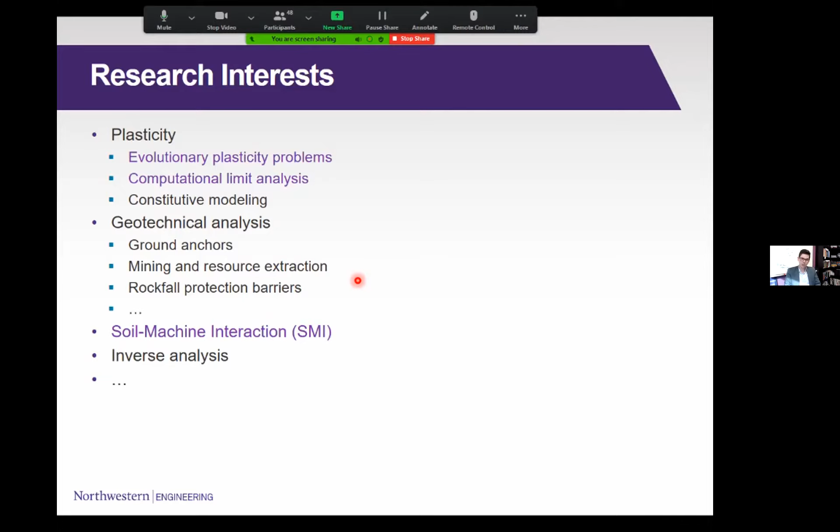I want to just touch on all of the things that I'm not going to get to talk about. I have varied interests, some in more fundamental plasticity and constitutive modeling. This is some work done in Australia with Andrew Abbo, Andrei Lyamin, and the late Professor Scott Sloan, who tragically died a couple of years ago, suddenly, too young. We've done work on yield surfaces and constitutive modeling, and more recently some interest in constitutive modeling.

My first PhD student—there's always a story to all of these—his work was actually on ground anchors and screw anchors, which are intellectually interesting because there isn't much known about the anchor installation process. We managed to build some models and do some centrifuge testing with the folks at University of Western Australia. My colleague Sam Stanier, whose name you're going to see, he's now at Cambridge, Christophe Gaudin, and Cyrus Todeshkejoei is the student who did this.

I'd love to talk about this work, because it's an ongoing interest. One of my students, Anna Stajanali, and I went to a field site, or a home actually, where helical anchors are being installed, and there's a lot of interesting things you can do there, both intellectually and practically.

Another one I just wanted to mention here is sort of a tangent. You feel like there's so many interesting problems in the world to solve, and at some stage you realize you have to focus on something. But we did some work on rockfall protection barriers, which involves plasticity, and again is amenable to simplified analysis and more complex numerical simulation. That's one of the themes I'm going to go with today.

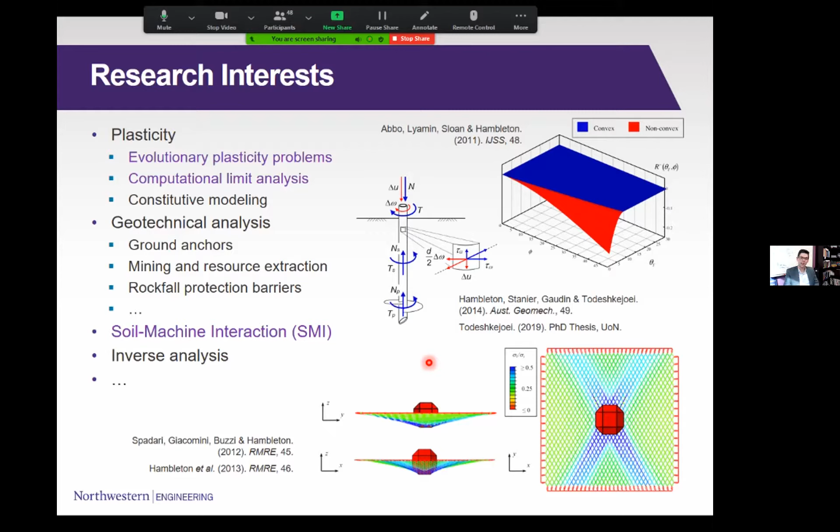What I'm going to go with is soil-machine interaction as the theme of the day. This is going to be an autobiographical and chronological presentation explaining the full story of how I got into these problems, how we started to build models, and how it continues to be an area of interest.

At Minnesota with Andrew Drescher, we started looking at the problem in the lower right. This was a Minnesota Department of Transportation project where it's a very practical test that they do. They proof roll, and measure the penetration depth of wheels to see how well they've compacted soils. Andrew and I embraced this as a pretty interesting plasticity problem, and actually a very elegant one, where the inverse analysis problem relates the penetration depth to the strength of the material.

We envisioned at that time—this might look familiar to some, I borrowed this from slides I had put together even when I was a PhD student at Minnesota—problems in mobility, problems in off-road vehicles and land damage.

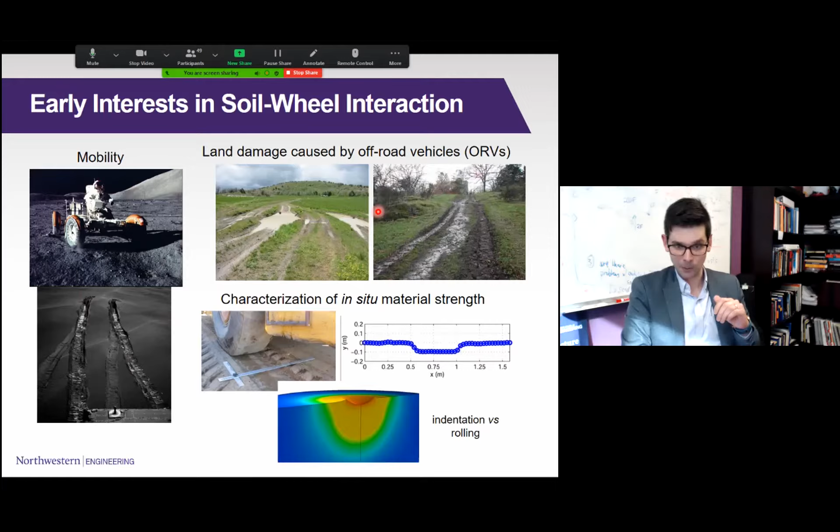We envisioned lots of ways that this could be interesting. The theme of the day that I want to go with, this is part one. I'm going to stick with wheels for the time being, but the theme of my presentation is going to be: which of these is the high fidelity model?

We do work on numerical simulation, the underpinnings to make those simulations work, running the simulations themselves. This, in fact, is work from University of Minnesota, a three-dimensional finite element simulation of a wheel rolling across a bed of soil.

And the question here is, you can do that. It's feasible to do that. You can also build these simplified approximate models and build analytical solutions for these. And one of my frustrations, as I've gotten into this, is that people perceive the left picture to be the high fidelity model.

I'm going to throw my colleagues at Caterpillar, the earth moving company, the heavy equipment manufacturer, under the bus here and say, they call these high fidelity models. And they use the term low fidelity, medium resolution, medium fidelity models for anything but this. If you're using equations, then it must be low fidelity. And I understand the drivers behind that. One is that you really generate beautiful pictures immediately when you do three-dimensional simulations of any kind.

I'm going to argue today, for the sake of being provocative, that actually that's the thing on the right that's the high fidelity model. And you'll hopefully be a little more convinced of that if you aren't already, in terms of what we can see when we start to build these models.

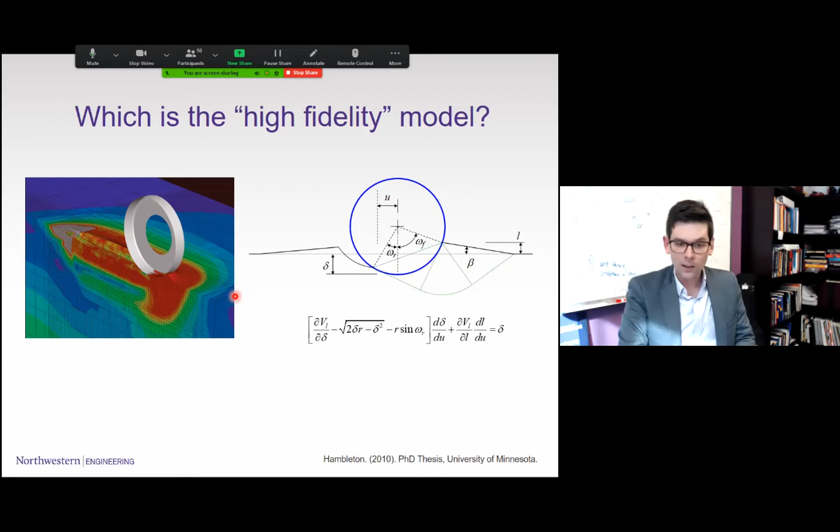I'm going to stick with the wheel for now, this rolling wheel problem, and show some work that we did after I left Minnesota, because it was just there for the picking. And I have to say, what drives these models is the fact that I'm an engineer at heart, and engineers contribute this to society, the fact that it just has to get done.

Many of us are mathematicians and scientists to various degrees, but what makes an engineer is that at the end of the day, I've just got to get a solution. I've just got to get the job done. So this chap, who shall remain nameless, is just getting the job done.

It's hard to get down to, you can't investigate the bottom of a shaft if the shaft is too small to crouch down into. So this chap here went in head first, thinking of safety, of course. There's a strap around his waist so that he can get pulled out of this at short notice. But this is an engineer at heart. And this is not, of course, me.

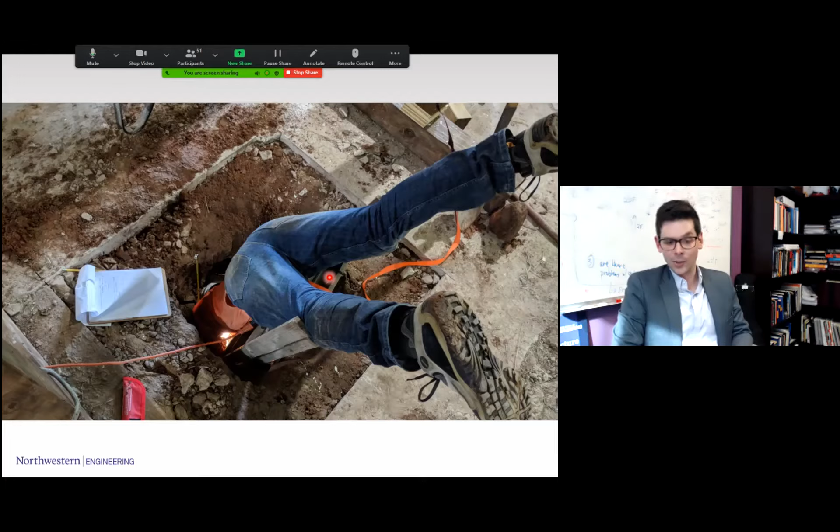But if it were me, this would be in the proud tradition of some of the things we do at Northwestern. Jorj Osterberg apparently had a reputation for going down into the bottom of caisson shafts, drilled shafts, in his suit and tie. And so that would be, of course, a proud tradition of Northwestern if it were me.

So here's the brutal engineering approach to solving this problem, which now I won't make so brutal. I think it's elegant, but we're going to make some very strong assumptions here. If I have a wheel that's rolling across a surface, I'm going to assume steady state conditions. You don't really need to assume steady state at this stage, but it helps to think about this problem this way.

There's a wheel rolling across the surface, and I'm interested in predicting, for example, the horizontal force F, depending on how much weight W is on the wheel and how much torque Q I apply to this wheel. And with total generality, I can write here that the wheel is in contact with the soil. The contact length here is H, and the contact angle is xi.

Now, what drives this assumption here is that somehow these forces that you're interested in that are acting at the axle have to correspond to the forces that are acting over the contact length here. And these I'll denote as V, H, and M, in keeping with what we do for combined loading problems in geomechanics. And actually, the moment that I've written this picture, an approach sort of springs to mind, or should, if you're familiar with VHM envelopes and bearing capacity problems under combined loadings.

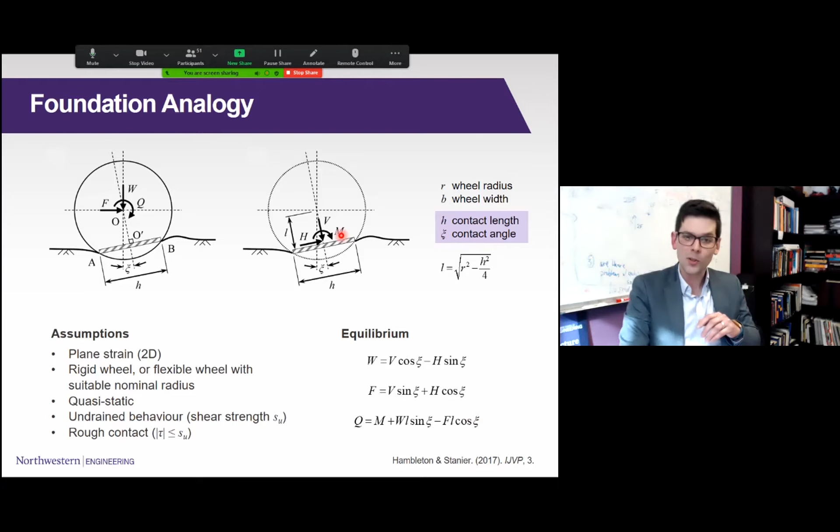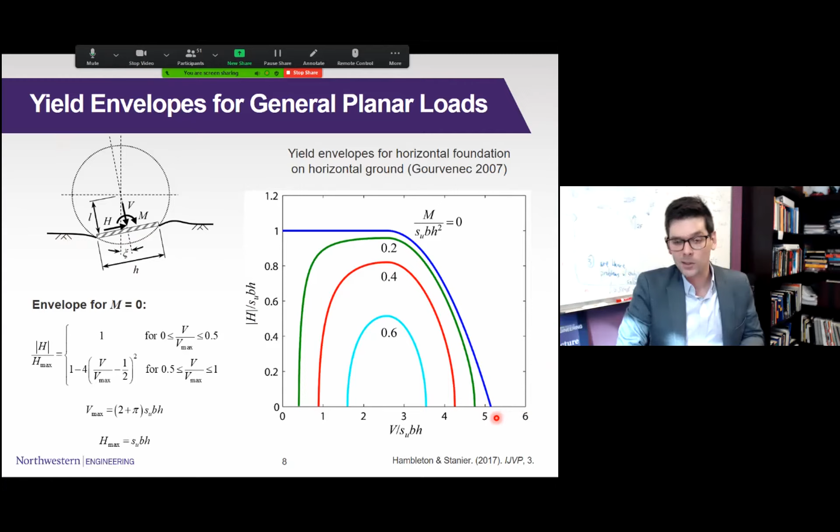Then as soon as I get enough normal force, I see a sharp decline in how much H I can apply, how much shearing resistance I can mobilize. It drops off and eventually reaches a point corresponding to the bearing capacity when there's no H at all—just pure V, pure vertical or normal loading. This is recognizable to some as 5.14, Prandtl's number, derived a long time ago.

At this stage, if you're willing to assume that on this interface you must obey the yield condition, life gets really easy. I'm going to do a couple of things that make it even easier. My colleague Sam Stanier and I thought about this for a while, and we can reasonably assume that the overturning moment at the interface is zero. That could be a subject of deeper discussion, but it's a reasonable assumption. So in comes assumption number one.

A very modest assumption is just a geometric approximation: the length L is approximately equal to R—it doesn't really matter. Here's a key assumption: we've said the contact length and contact angle are related to the penetration depth of the wheel. Explaining where this comes from would take more time, and frankly it's not of great interest—you can just take it as reasonable. As the penetration depth of the wheel increases, the contact length and contact angle increase, and I can parameterize all these curves in terms of penetration depth.

That was a mouthful—a very quick description of everything that goes into this model—and here is the final outcome, which I'd argue was very simply obtained. What's being plotted is the horizontal force: this is the resistance on the wheel, the lateral resistance. This would be drawbar pull in some of the mobility literature, or braking force—how much your axle is getting pushed backwards or forwards as a function of the weight sitting on the wheel, for different values of torque.

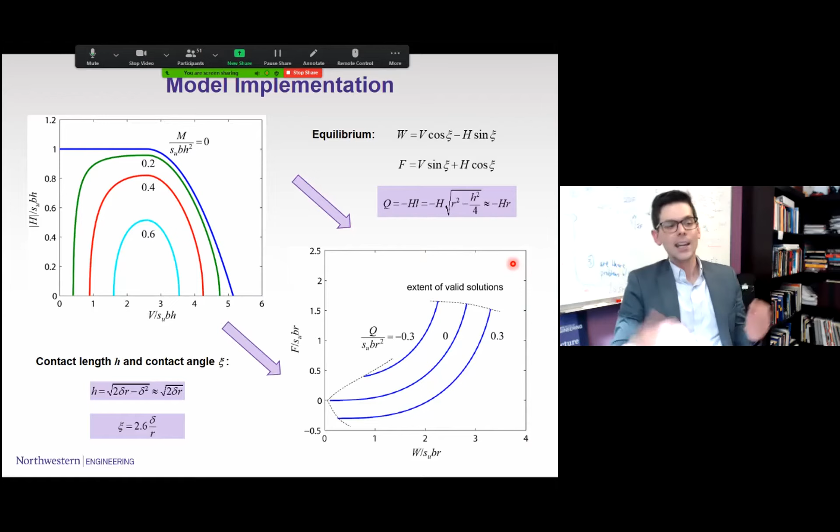Is it right? To answer that question, Sam Stanier and I went first and foremost to a solution that I was aware of that is really underappreciated, and a commentary on how science proceeds. Ian Collins in 1972 did a really careful, thorough, rigorous analysis of this problem, where he constructed slip line solutions, used method of characteristics in plasticity, carefully building these slip line solutions for different combinations of wheel loading.

Everything here is very similar to what I showed, parameterized by alpha, this internal angle defining the contact length. One of the lessons I've learned as an academic, for the younger folks out there, is that I think one of the reasons this paper didn't get much traction is because it's so dense, wonderfully dense in my opinion, but very unassuming. It's dense, it's rigorous, and it takes a little bit of time to unfold these solutions that are proposed. So this is what is actually reproduced from the paper.

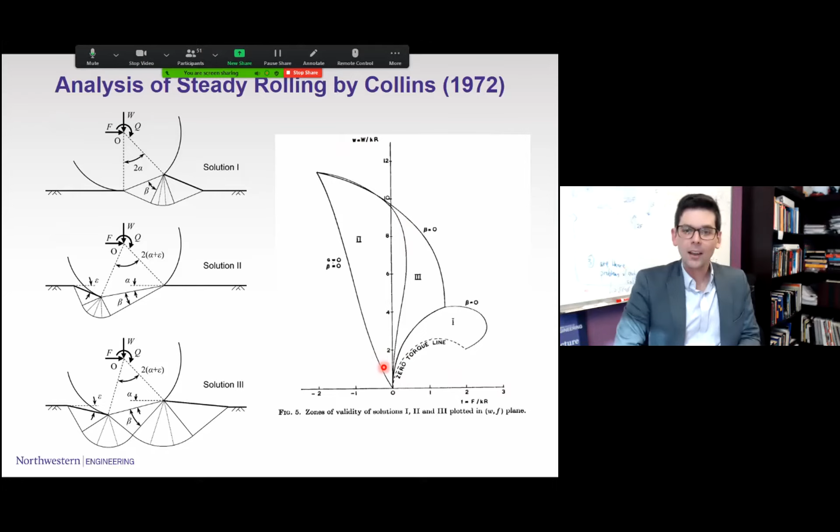Step number one is really just to take these strange looking curves and plot them in a way that's more compatible with what I showed before. On the left is what you've already seen, the one you get from the model I showed. On the right are these curves obtained through the slip line solutions of Collins.

Notice, first and foremost, how strange they are. It's rigorous, as I said, unassuming, dense, and there's a lot that goes into this. It's really quite beautiful, but the solutions are very strange.

Again, if you look at the towed case, a wheel that's getting just pulled across the surface with no torque, you can see already I have a multiplicity of solutions here. At a certain weight, I can actually construct two different solutions.

If I have the driven wheel, it gets even worse. If I pick a certain value of weight here, right on this line, I can have up to 3 different solutions for a particular value of applied weight to the wheel. So one of the reasons this maybe didn't get more traction is because it was so strange.

Now I'll draw your attention to the fact that these two plots are very similar. Look at the axes here, 2.5, 2.5, 4, 4. Quantitatively, it's a really good match between this very approximate simplified model and this more rigorous analysis completed by Collins, which strictly speaking is the more thorough, detailed version of what I've shown here today. That was a very satisfying result.

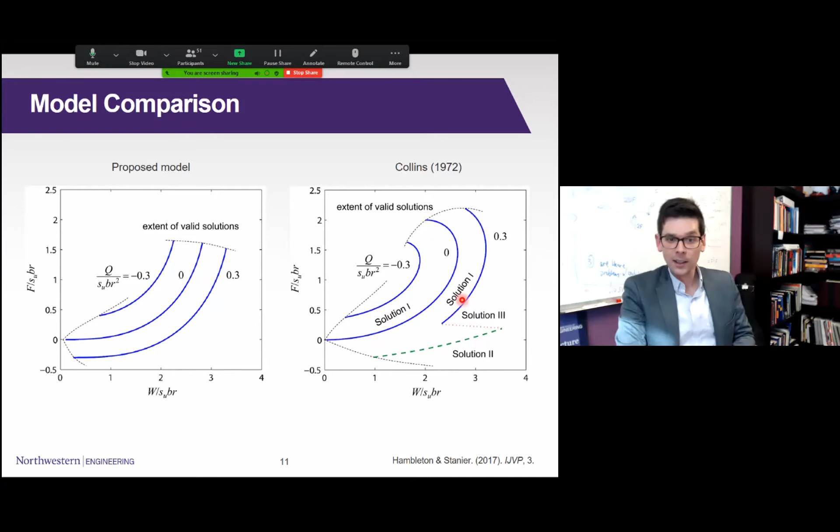I've already made this point that I'm an engineer. I will always be an engineer, and I'm not really happy until I actually have some data to compare this against. One of the interesting situations here is that there really isn't that great a dataset. You'd think it's clay, saturated clay—haven't we run tests on this before? The best that I could find, and I have yet to encounter somebody who has told me there's a database of results that I'm missing here.

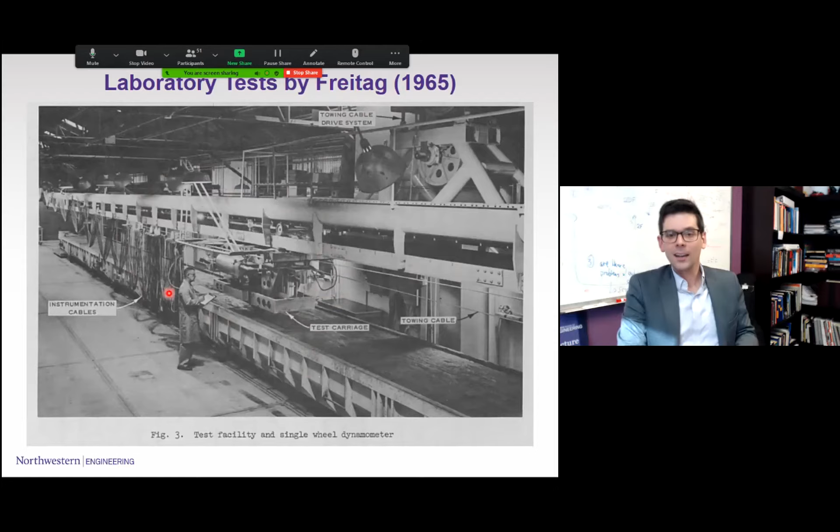The best I can find is this thesis by Freitag at the US Waterways Experiment Station at Vicksburg. They built this big test rig, and in this case, what they did—which was a mistake in my opinion, though I understand what was driving this—is they considered flexible wheels, tires like the ones you'd actually have on vehicles. This introduces a confounding factor: these are really three-dimensional wheels, flexible, with a strange geometry. So the data is valuable, but unfortunately it's not compatible with something we'd want to compare.

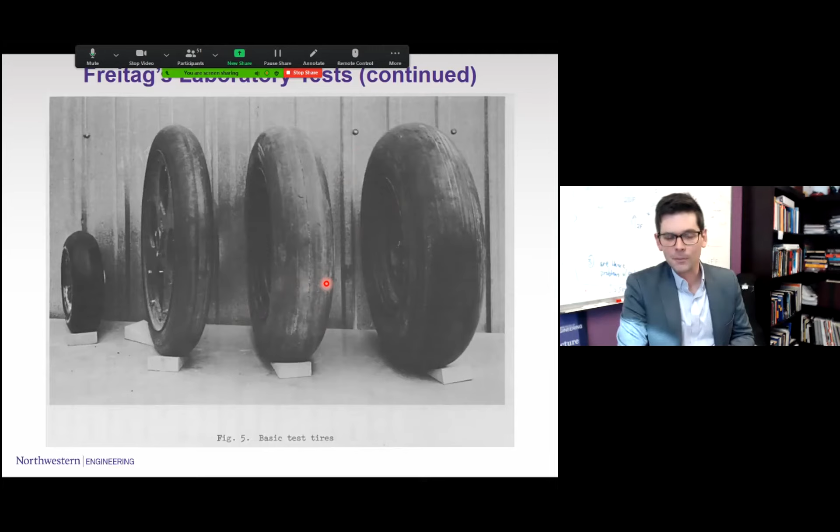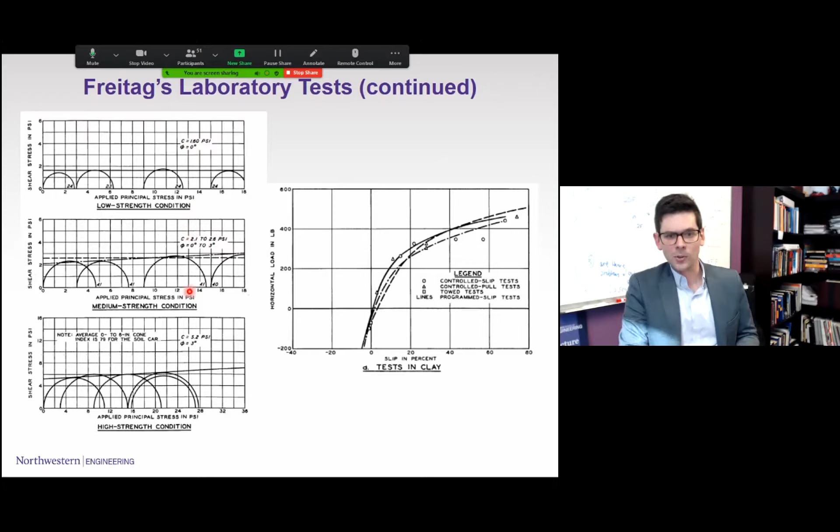What makes this data wonderful, and surprisingly it's not more broadly true, is that they actually did triaxial compression tests on the soil and characterized it very thoroughly. You can see values reported as cohesion, in keeping with how we still educate civil engineering students in the US. It should really be called undrained shear strength, if you believe the British school of thought, which I think is more and more coming to the US. They report undrained shear strength values, unfortunately in units of PSI, but we can easily convert and get some data.

Without going into more detail, I want to jump to the end: they didn't do a braked wheel, but in this study Freitag did the driven wheel case. So here are two sets of curves: the zero torque wheel, the towed wheel, and the driven wheel.

We are unable to find data like that, and at the moment we're not able to generate data like that in our lab, but you'll see what kind of data we can generate in our lab.

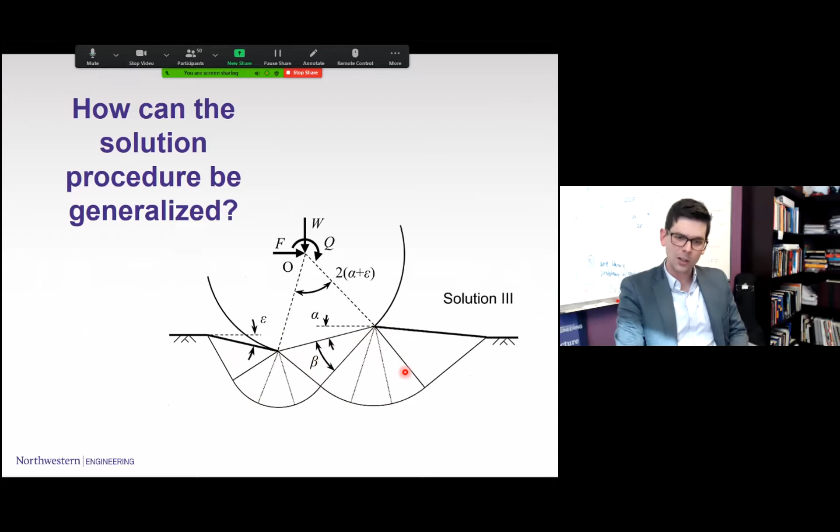So here I'm going to switch gears, part 2. The question I'm going to start to interrogate now is that this method of characteristics approach is very powerful but limited, in the sense that it's a limited subset of problems we can solve this way. So how can you do this more generally? Part 2 of my talk is going to go into how I can construct these solutions. I'm going to have to go to a numerical approach, but by the end you'll see I can use a pretty simple numerical approach.

Again, this is autobiographical—part of my training at the University of Minnesota, the way that Andrew Drescher and I were thinking about limit analysis. Kinematic methods are a way to get semi-analytical solutions. For a general problem where I'm interested in the limit load, I can break the collapse mechanism, considering the velocity field, the flow field corresponding to collapse, in a simplified way. Here we think of it as rigid triangular blocks that can slide relative to one another—a relatively easy way to construct these solutions.

The trick to constructing these solutions is you have to make sure for your material that you're obeying the plastic flow rule, you're obeying the jump condition on each of these discontinuities. And if you're doing this semi-analytically, what you do is construct a hodograph that relates all of the velocities V1, V2, V3 of these different blocks in such a way that you're ensured that the jump condition is satisfied.

And this lends itself to optimization. It's semi-analytical. I have to use a numerical scheme to find the angles. I can now optimize the angles here. And what you're essentially doing is finding the optimal locations of these velocity discontinuities, these jumps that can appear at different locations.

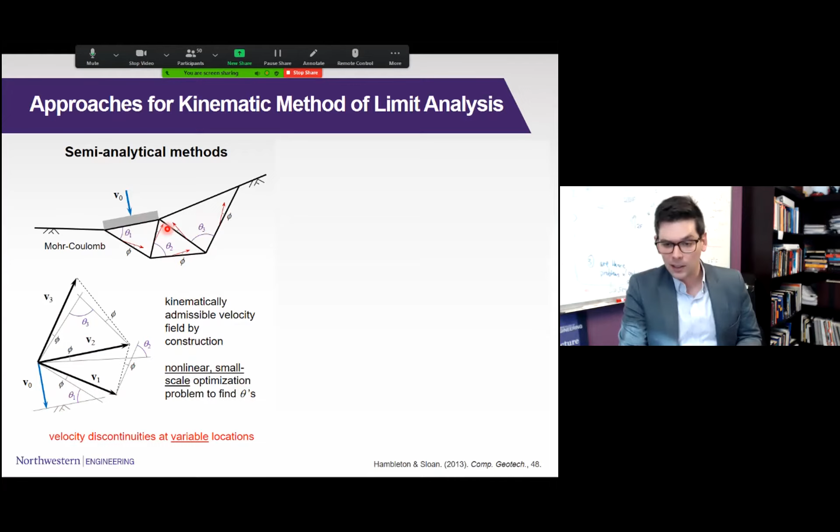Now, one of the things that I picked up while I was in Australia with the late Professor Scott Sloan is how you can do this in a very different way using finite element limit analysis, which Professor Drescher was never entirely sure about, and we've never resumed that conversation about. I'm now convinced that this is completely legitimate.

The way these methods work is that you now use a finite element interpolation to discretize a velocity field, and your objective then is to find the nodal values of velocity that somehow satisfy the constraints, these jump constraints, and other constraints arising from the flow rule.

And in this case, because you're dropping in a mesh, you can still think about these edges as jumps. It's right to do that, jumps between velocities and different elements. The thing is that these are now at fixed locations. The velocity discontinuities are fixed in space. They don't move. The question here is, how can we make these two things compatible?

There's a lot of power in this. These methods are okay. They're very quick, but sometimes they don't lead to very good solutions, and they're just not compatible. And you can't get the simple solution that you can get with these ones.

So what we did was we figured out how to make them compatible, and that is, I'm going to show you a numerical scheme which essentially optimizes the location of these velocity discontinuities when you use a finite element interpolation. And this will make a lot more sense when I show the examples.

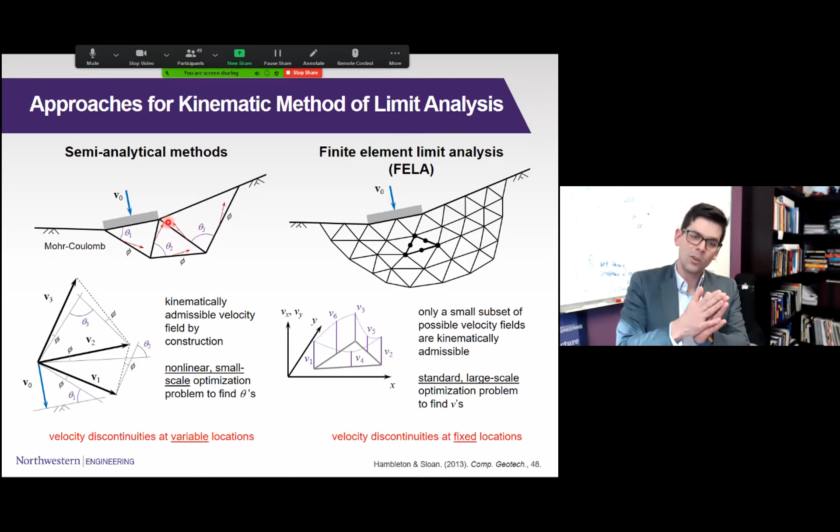My condition, or probably better still to say, pick this jump, which is between two adjacent regions. This block has a velocity, this block has a velocity. And along this jump, I have to have this condition, which says that the jump is compatible with the plastic flow rule.

Here's one way to write it that's going to be amenable to numerical analysis. What's in here are xk, the coordinates of the endpoints of the jump. These p matrices are just the matrices of zeros and ones. And as I say, this is just going to lend itself to easy mathematical manipulation in a minute.

And here is the jump in the normal expressed in terms of coordinates of the velocity jump and velocities between the two blocks. Here is the jump in the tangential component of velocity, and this is the jump condition.

The first thing that I'm going to do here right away is I'm going to say, I don't like this absolute value, so I'm going to replace this quantity here with a mu that I don't know yet. And here then pops out, for all of my k discontinuities, I have to satisfy these jump conditions, and I have k equations that, notice, are linear in the velocity and with respect to mu.

I can do the usual thing and derive an expression for the limit load in terms of mu and velocity, and I'm going to get a linear objective function, linear in the unknowns. And here comes the trick.

This unknown mu that is at the moment just replacing this jump in the shear component of velocity, all I'm going to do is insist that whatever that is, it's greater than or equal to the square root of lambda squared, where lambda now is the original quantity that appeared in the absolute value.

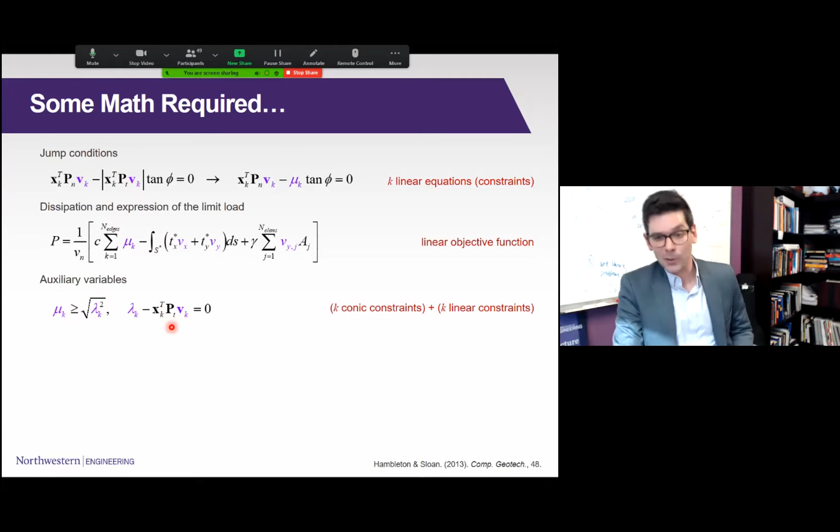And this is a trick which essentially enforces the absolute value and means that I can now use second order cone programming. This is in the canonical form of a second order cone programming problem. If it weren't for these so-called conic constraints here, this might be recognizable, and that's what I'm setting up here, as a linear programming problem.

And linear programming problems are, of course, very, very quick to solve, straightforward to solve using modern optimization techniques. That's sort of a standard formulation.

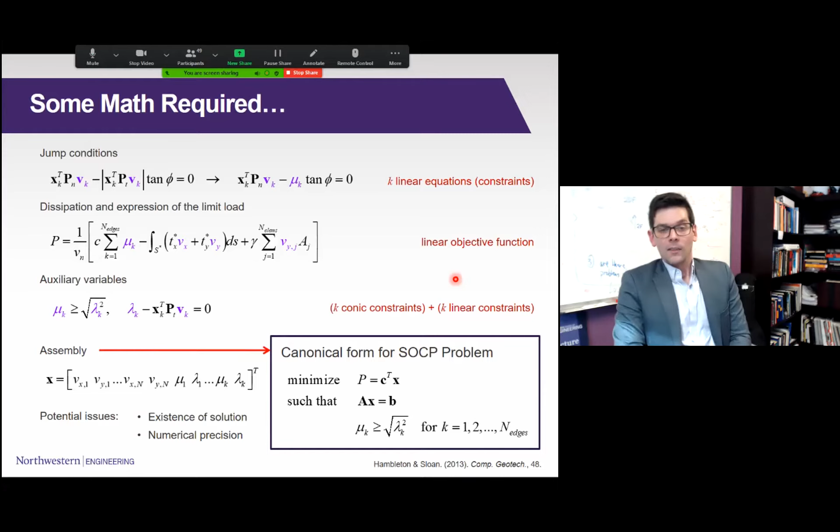Now, the big trick actually in this work, that was kind of known already with what I showed before, if you want to now optimize the locations of the velocity discontinuities, what happens is that the x's in these equations that I just shown become unknowns as well. What do you do about that?

Do I have to go to a general nonlinear optimization tool to get this to work? The answer is no. And the solution strategy that we proposed was just linearize about known points. So you have an existing solution that you trust.

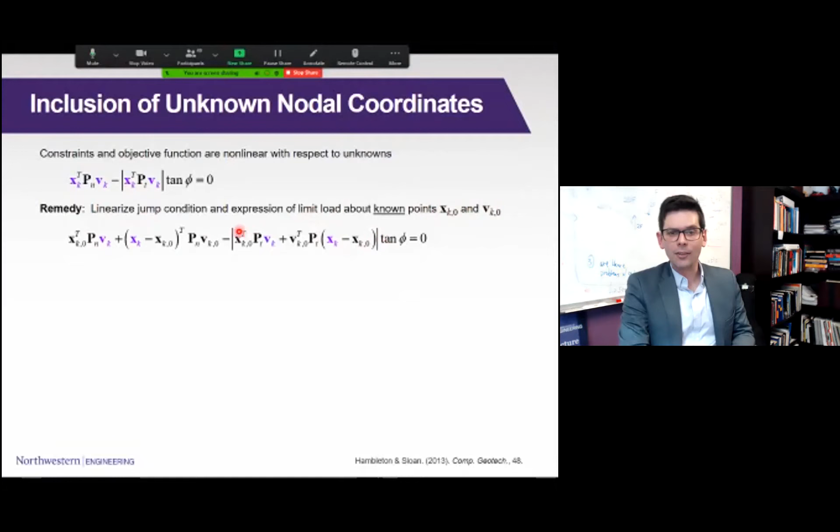Linearize the coordinates for the velocity discontinuities, the velocities themselves, linearize this expression, and then you return to having a linear or a second order cone programming problem. I can also linearize other things that are in here, the area that I need.

One thing to note in this linearization is that if I keep the coordinates fixed... what happens at the top here is that the x's are now unknown. That's what makes this nonlinear. But if you treat the x's as being known, you return to the original jump condition you were using, and you're solving exactly the same problem that I showed previously.

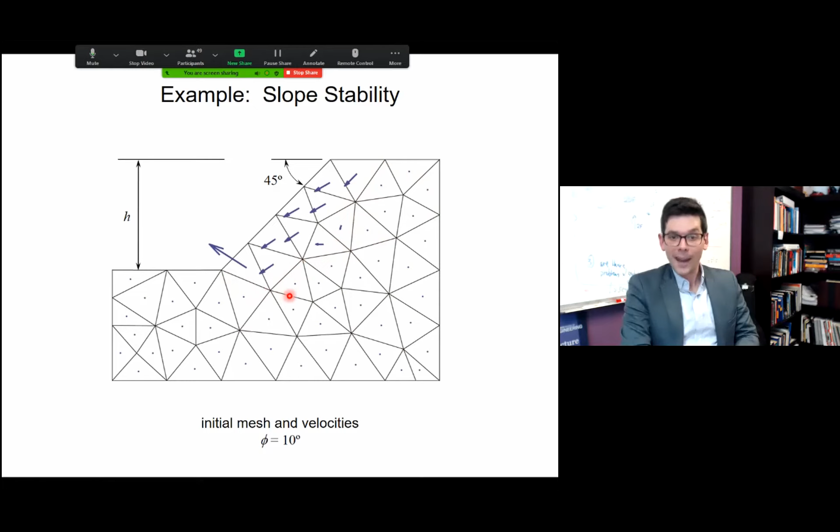But now what we can do is start to perturb the solution. That was the second slide I showed. Perturb and solve each time for the optimal locations of new nodal positions and new velocities. Keep perturbing the solution, and you wind up with this, which now looks lovely. This looks more like one of the solutions we would assume, and looks much more believable.

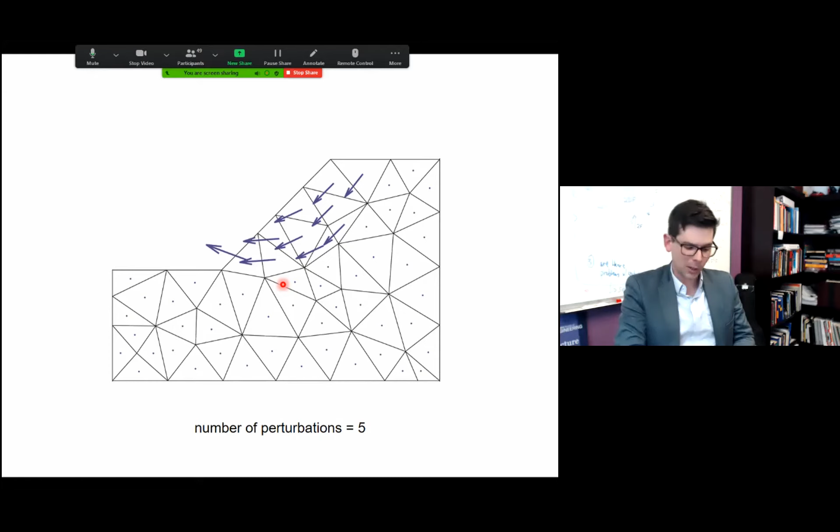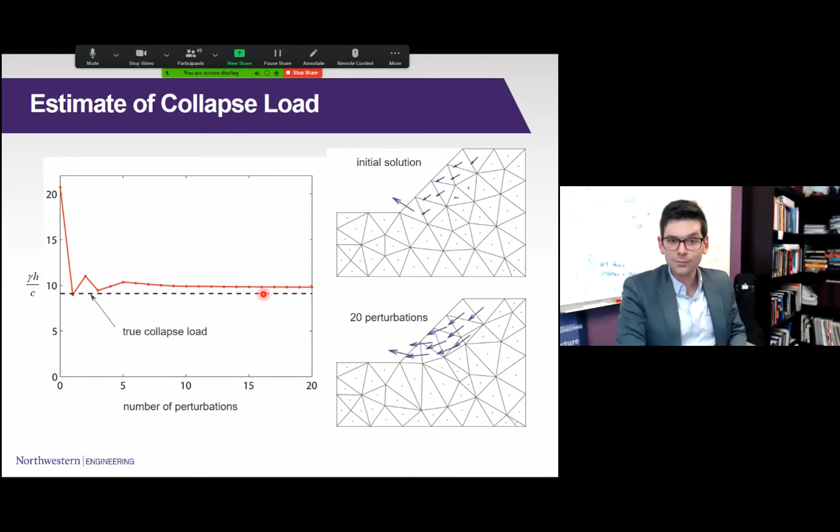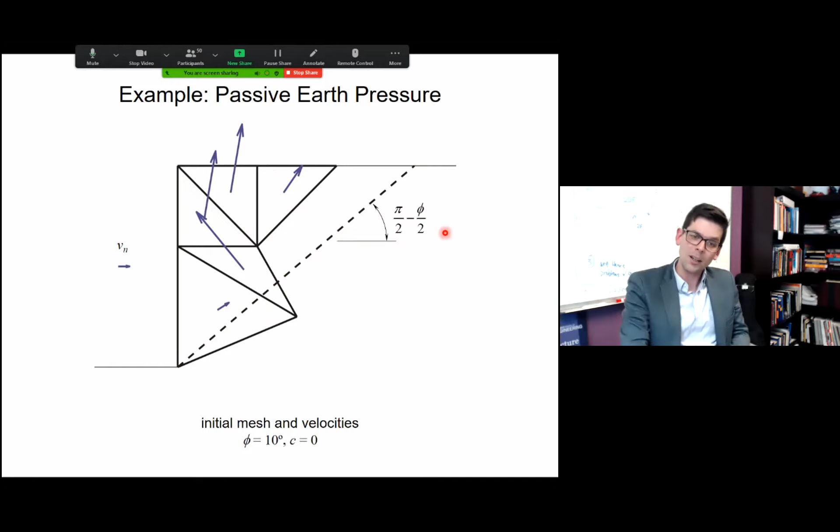I've run the first stage of this optimizer to compute element velocities, and I'm able miraculously to get a solution. The true solution is going to be the Coulomb slip surface, inclined at pi over 2 minus phi, the friction angle of the soil, over 2. If I perturb the solution, if I'm happy to wait and keep perturbing that very bad guess, you can see that I'm able to get closer and closer and eventually recover the exact solution, basically within 55 perturbation steps.

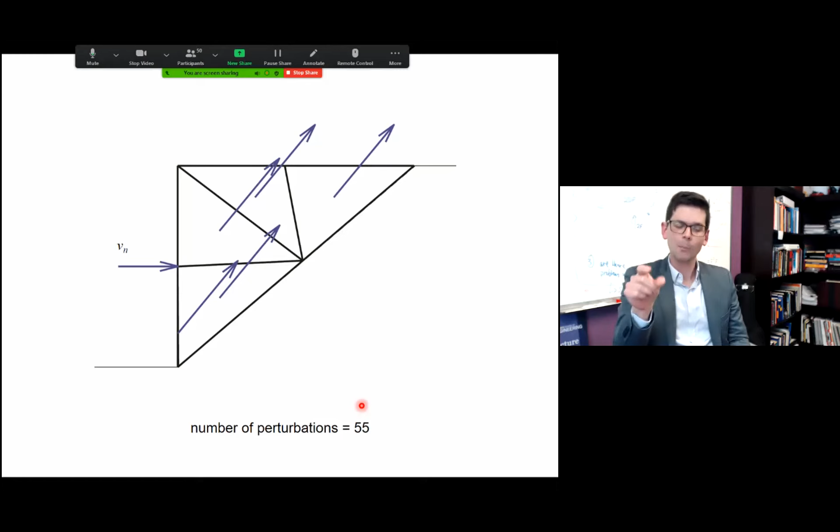So that's the end of part 2 of my talk, which is focused on these solutions that we need for these evolutionary plasticity problems that are somehow fundamental. I could, in principle, use that to go back to my wheel analysis and see what sorts of new and interesting things I can do there. But I'm going to move to part 3, and stick with this idea of passive earth pressure for a minute.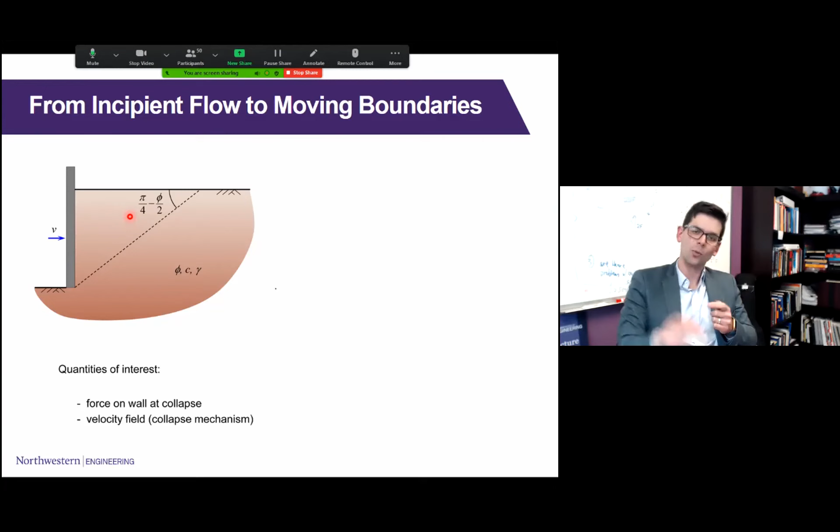So part 3 is now: what happens if I keep moving this wall? I'm interested in soil-machine interaction in a general way, and what I want to shift to is cutting problems, earth-moving problems. So I can stick with the example I just showed, but ask: what happens if I keep pushing that wall? What happens if I don't stop?

What's going to happen qualitatively is the geometry is changing. It's now a moving boundary value problem. I'm going to have a force displacement history, and things are going to depend on the displacement. I've got all kinds of questions I can start to ask: do I have a steady state eventually? Can I reach some sort of pseudo steady state?

The way I started to approach this problem, when I was thinking about it in Australia, was wondering if this cutting problem, this translating wall problem, is itself amenable to simplified analysis. And you do as one does when engaged with these things: you're sitting at home, you're in Australia, so Stockton beach sand is right there, just down the road.

You fill up a tub of sand and grab a copy of, in this case, the Intellectual Devotional given to me by my father, which turned out not only to be an interesting read but also an interesting research tool. I was sitting there with this tub of sand, pushing the book along the surface, just looking at what is happening in this region of soil as I'm pushing the book ahead. It turns out that was the genesis of a very simple solution, which I'll show in a minute.

But before showing the simplified solution, I want to motivate this problem a bit more. As I was thinking about this intellectually interesting moving boundary value problem, I was also thinking, this is everywhere, isn't it? Earth moving problems are like this, agricultural problems.

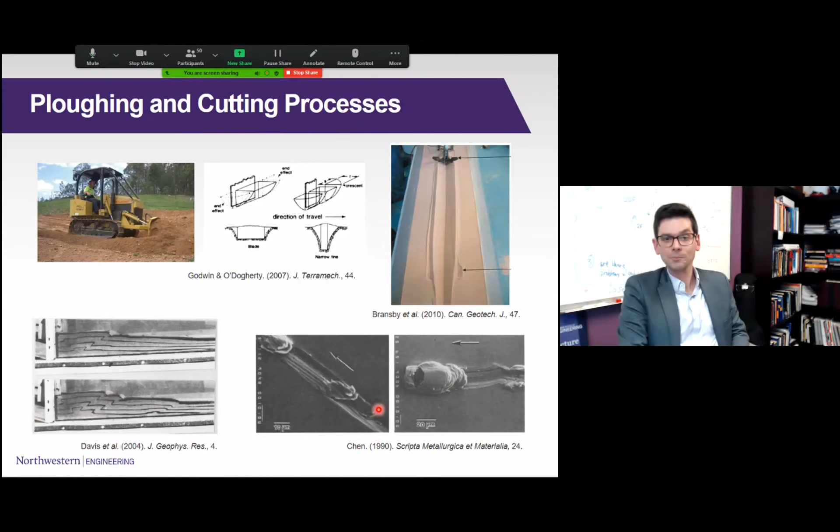And then at very small scales, you have plowing processes as well. Since then it's just gone from, oh yeah, truly this is everywhere. So I've lumped together thinking about Australia - this is in Western Australia, the gold mines. We do construction, we move earth on a massive scale, for construction and mining, for agriculture. Eventually we're going to be moving it elsewhere too - there's NASA challenges now about how we're going to build on the moon and on Mars. And creatures like ants, earthworms, rodents have been moving earth for a long, long time. So there's no limit to how you can think about these interesting earth moving problems.

I know I'm getting sort of short on time. I think I can present all of what's here. I want to return to this idea of fidelity.

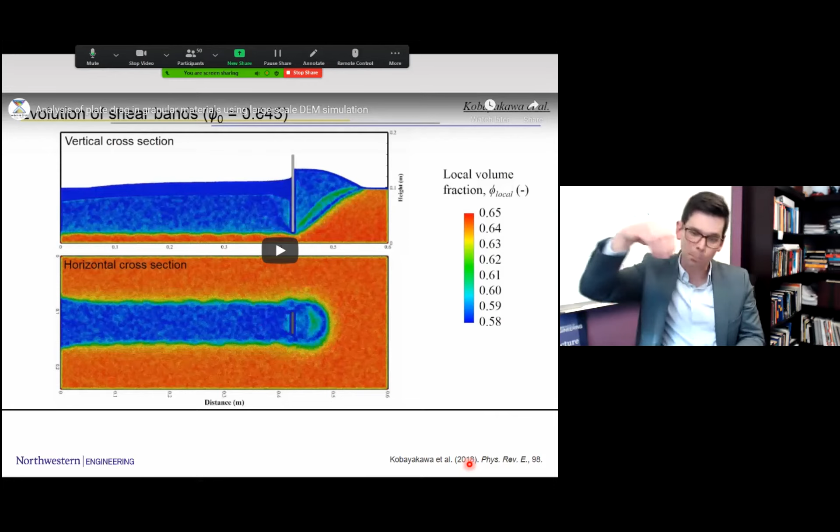This is work done in 2018. I was playing around with this book in my living room with my patient wife - the children hadn't yet arrived, so it was just Rachel being very patient with me as I played around with this.

Later, these chaps who I met at a workshop not that long ago showed a really beautiful analysis where they went to great lengths to do the numerical simulation of this cutting problem. There's a huge number of particles here - that's really one of the things that makes this study remarkable.

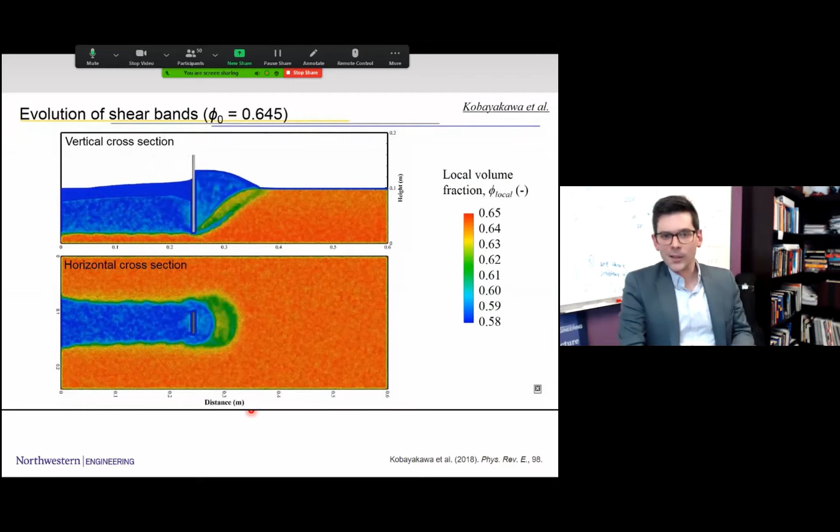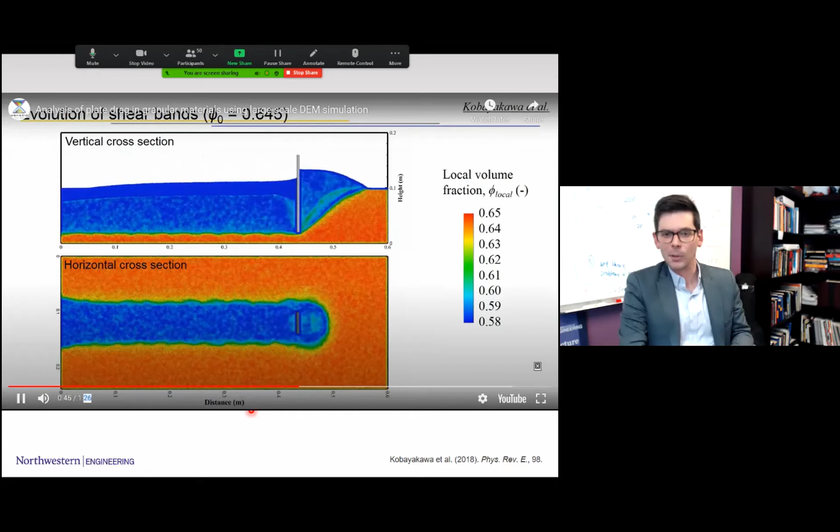I won't go into details, but notice that in this DEM, discrete element method simulation, they do this cutting problem, and you can see these bands forming and disappearing. You can see there are oscillations in the force displacement history as these shear bands form in the material and then are deactivated and disappear.

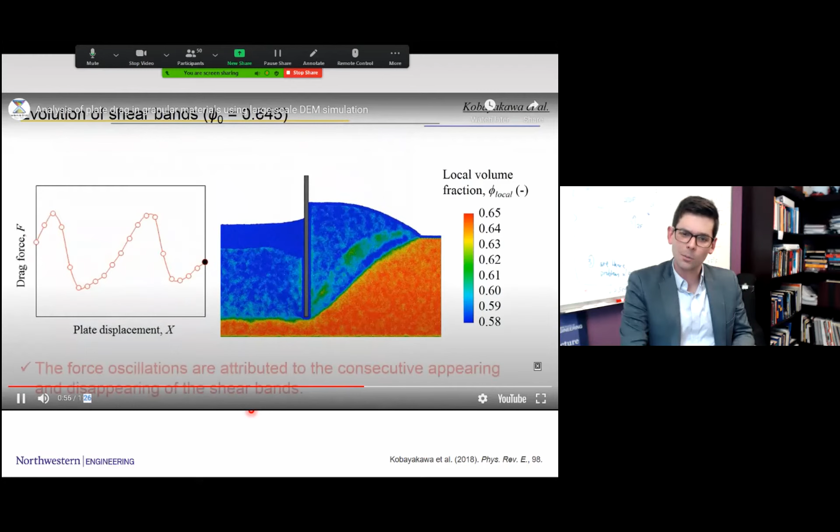Keep in mind, this is 2018. The work I'm going to show, we published in 2014. We looked at this problem and said, here is another problem amenable to simplified analysis. If I've got a wall moving in a different direction now, what I can do is postulate that I have a band, but a band at an unknown location.

Beta now is going to be the inclination of my shear band, and I'm interested in predicting the progression of the shear band, or more generally, predicting the progression of the force. How much does the force P increase as you displace the blade into the material?

You'll make the same assumptions, but now it's sand, not clay. It's plane strain, quasi-static, and here it's sand with just a friction angle, internal friction angle. I'm going to assume the wall is rough. The force on the wall is P. The height of this material that's being pushed around is H. The penetration depth is delta, like it was for the wheel.

Beta is the inclination of a single slip surface, an unknown inclination angle. From the yield condition and from equilibrium, you can immediately derive, without loss of generality — I'm also assuming this is a straight line. That isn't a strong assumption, it could be weakened.

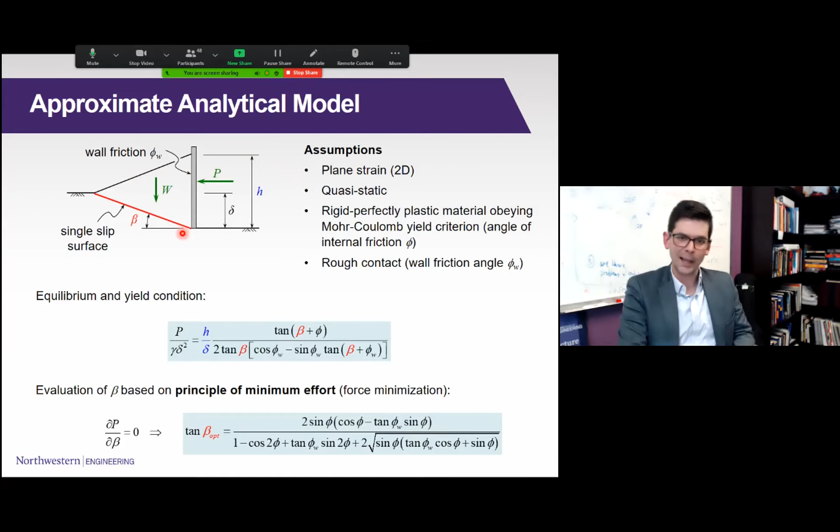We'll assume that everything I displace as I'm pushing through a displacement delta winds up in the accumulated material here, and I'll neglect the fact that there's contraction and dilatancy. I can then use simple volume balance to say that the height has to be equal to this expression.

I feel like I'm done until I actually plot the solution, which you'll see in a minute. And this solution is strange, because at some point the inclination of the material ahead of the blade is going to grow unlimitedly — and it's sand, so it's going to start collapsing. At some value of alpha, I'm going to have collapse occurring, and then my solution is just ridiculous. It doesn't make any physical sense.

So you could say, let's fix that problem. If I know that collapsing is going to happen — and there's actually an example of that done in the literature — why don't we just assume from the outset that this angle alpha, the inclination of the moving front of this accumulation of material, is equal to the friction angle. That's like it's continuously collapsing, just sitting at the angle of repose.

What that means is that I can derive a new beta in the context of this solution. So I've got two solutions now to this problem. Which one is right? It turns out neither of them.

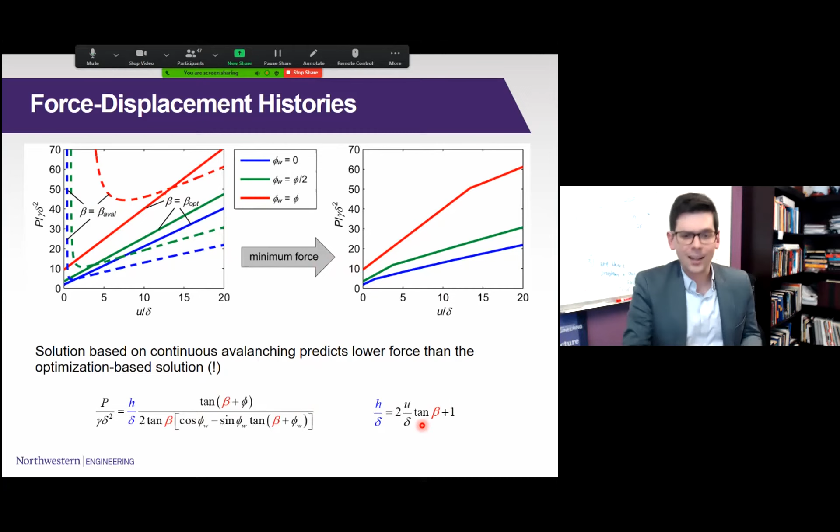It turns out that H depends on beta, and I need to plug in and optimize that whole expression together. This is a surprise - if you go into the existing literature on this, it's really overlooked. I don't have time to go into the full depths of why this is important, but you can at least appreciate there are two families of solutions and neither of them are right. In fact, the complete solution comes from putting it all together.

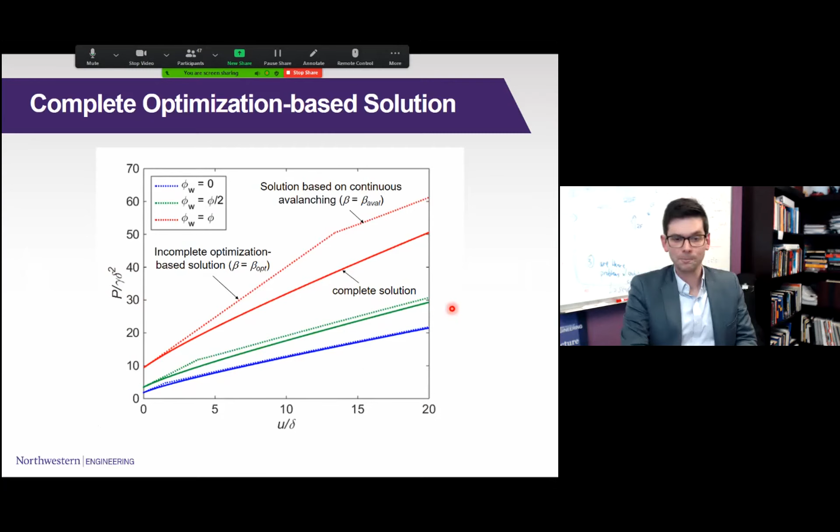You can do it, I'm not going to go into details on that. The complete solution generates a lateral force that's less than either of the other two solutions that I showed.

Now let's talk about how we can make this a little bit more general still. I know I'm running out of time, so this will have to be pretty quick. What about these jumping bands? We saw that the geometry of the surface was pretty irregular.

So one thing we're going to do right away is discretize the surface using nodes, constructing the surface as the line segments between these nodes.

Now the solution proceeds as follows: I can have any band at any location. Beta, the angle of the band, can be whatever it wants to be. I'm going to optimize this ultimately, and the bands are going to span from the toe of the blade to a node - that's the only thing I'm going to insist on, so that I can bookkeep things and construct this.

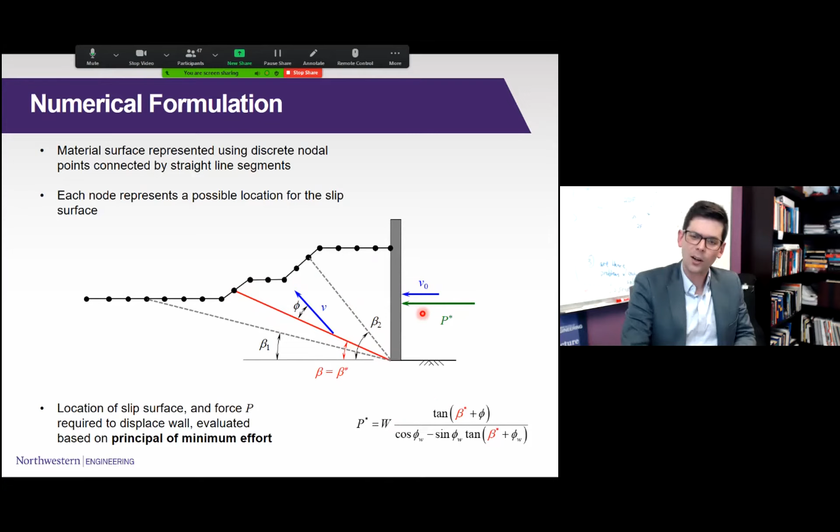I'm going to construct this solution by saying within every increment of deformation, I'll find the P star that's the least, using the principle of minimum effort again. Once I've found a solution within an increment of deformation, my kinematics are really simple.

All I've got to do is - I've got a rigid block of material here - shift the nodes that are moving by an amount that corresponds to my increment of deformation. I've plotted velocity here. I can see somebody's drawing on the screen, which I like.

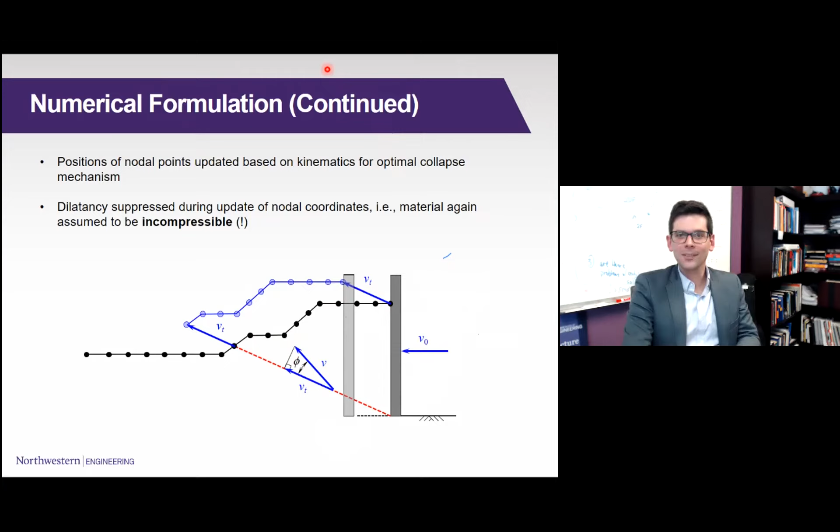I love interactive presentations. We should probably clear that. Oh yeah, and oops, resume share. Somebody who's in control of the presentation will have to clear annotations if you want.

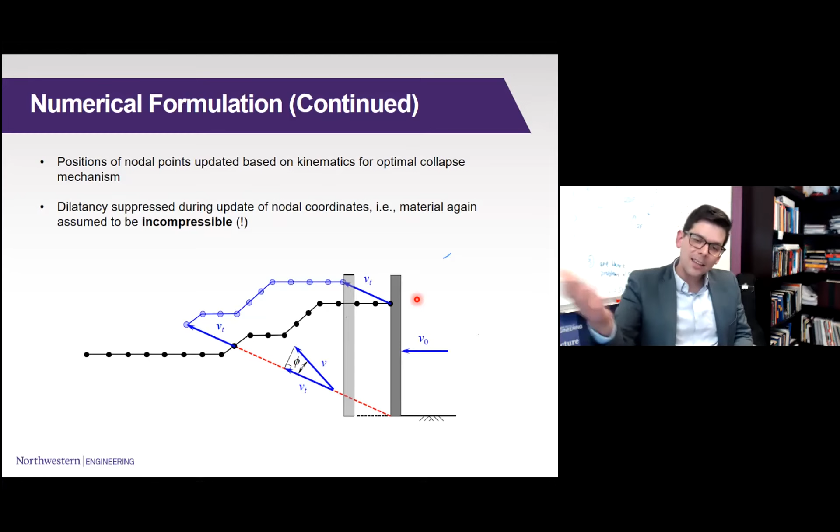So updating the kinematics within an increment of deformation is going to be pretty simple. The trick to getting these jumping shear bands, it turns out, is because I'm in dense sand, I have to somehow have softening.

The proposal here in this solution is to ascribe a state variable to each one of the nodes that's able to track how much softening occurs as the band is sitting on that particular node.

As the solution progresses, as the shear increases on that node, if the band is sitting on that node, we're going to decrease the friction angle. It's going to soften up to some mobilization length UR, and then it's going to hit the residual value corresponding to critical state for the sand.

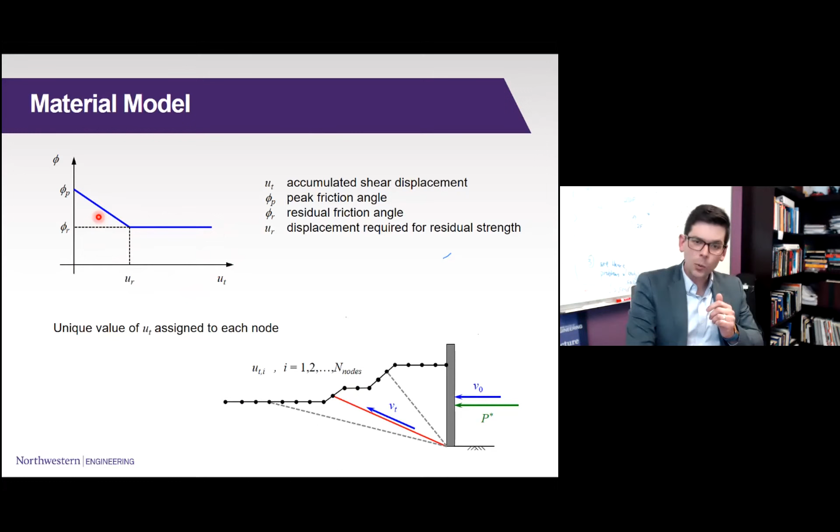That's all I need - I need to introduce softening in this way, and think about a few more algorithmic details. For example, this idea that the material is collapsing - you have to do something about that. Turns out that's fairly straightforward.

The overall algorithm, I'm not going to go into all the details, is just keep going, updating your displacement increment, marching forward while looping over. It's a very simple optimization procedure here.

You just look at all of the nodes, evaluate what the force should be if the slip surface is on that node, and there's a little bit of meshing - thinking about how nodes are colliding with each other that we have to do - and just repeat that procedure: find the optimal mechanism, update the kinematics, and keep marching forward.

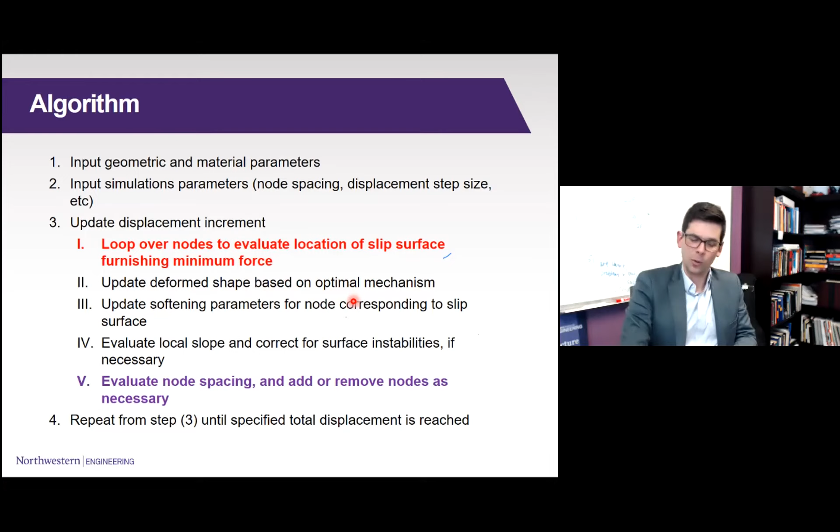It's a very, very simple MATLAB script. It's very quick to run.

Now what happens when I put in softening? A little bit of softening, where the peak friction angle is greater than the residual friction angle. The initial solution looks very much the same, but I remain on a band only so long.

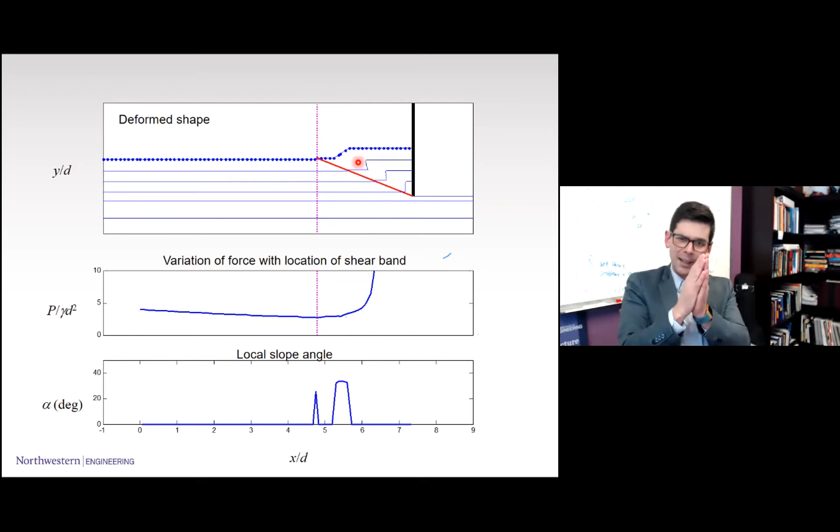Then it's advantageous for a new band to form in virgin material. It becomes harder and harder to stay on the old band, and the solution jumps to a new band, and you start to soften on that band until again it becomes harder and harder to shear on it, and you jump to another band.

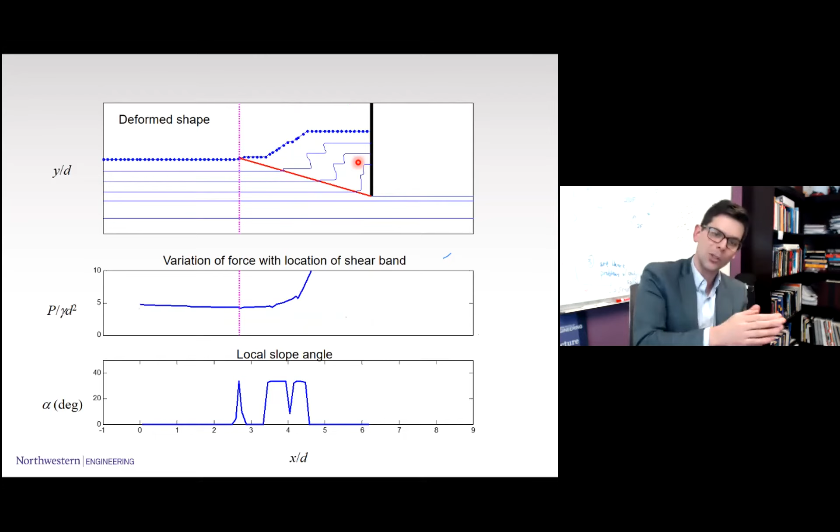The final solution here is a simple step-like solution where you can see these deactivated shear bands in the current bands. You can see little dips in the force plotted as a function of which node I'm sitting at, and those dips are because I've softened in the region of the band.

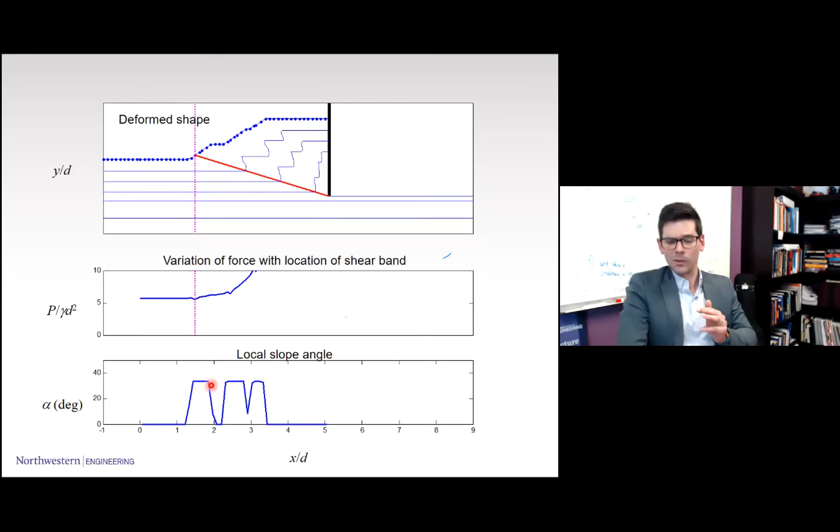A last point here, which is interesting, is that it's now really critical to think about avalanching, because the local slope angle is definitely approaching the angle of repose of the material, and I need to have something in my solution to deal with that.

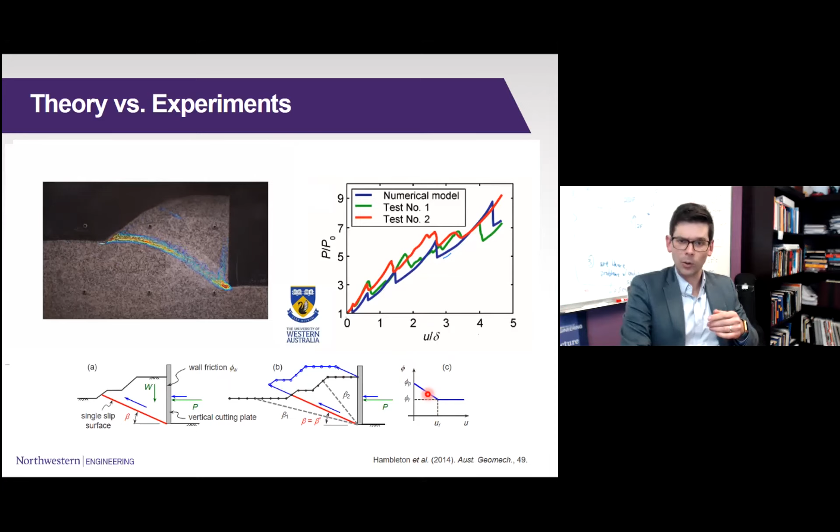Now I'm at the end here, and I'll breeze through the rest and show some recent work by Jaffe quickly. We did careful experiments, digital image correlation, and we can see these jumping shear bands. We can measure the horizontal force and the displacement, and the solution works surprisingly well. This simple sequential kinematic approach with softening works very, very well to solve the problem.

I'm kind of done with my presentation, but I'm going to show you a couple of quick enhancements we're working on. Part 2 of my talk was about how we're not constrained by these really simple mechanisms—we can have more complicated mechanisms, and using this perturbation approach it's pretty reasonable to compute and work with these very simple solutions that are more advanced.

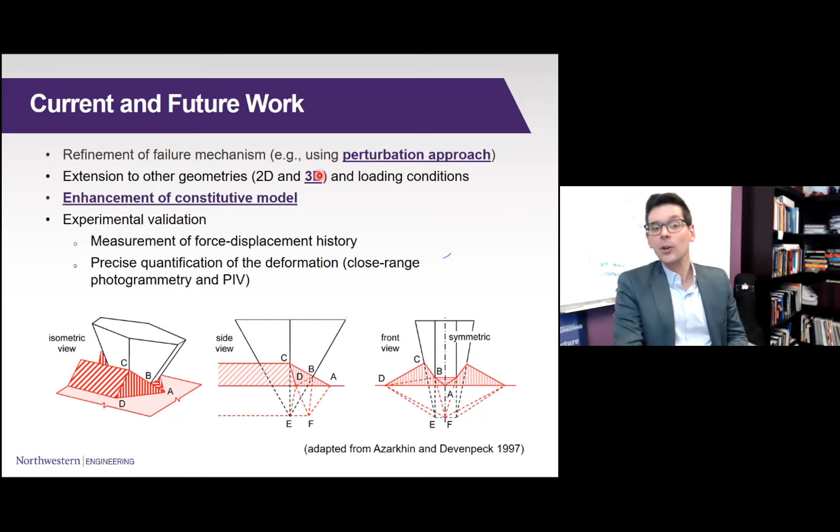You can easily move to 3D, and you can easily think about more advanced constitutive modeling, which is what I'm going to end on. My former postdoc, Jinhao Chi, worked with me on getting this to work in 3D. We've got that going, though I won't go into details on that.

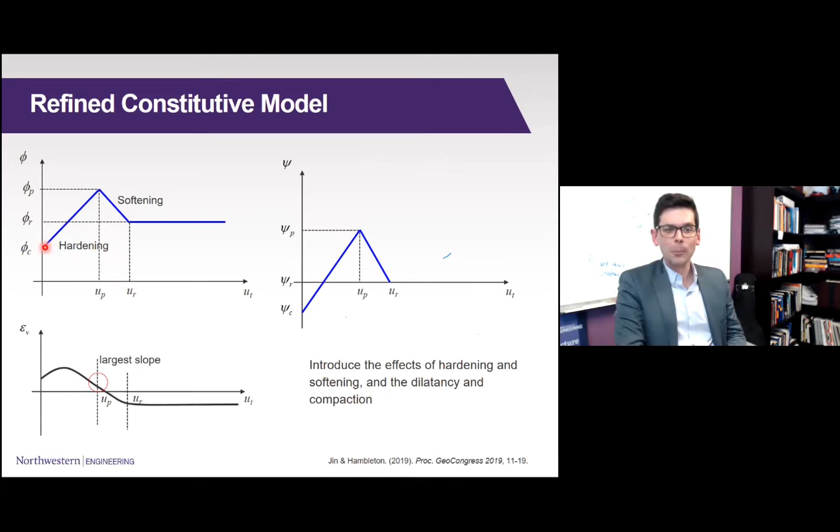Jifei Jin, who's maybe even beaming in here now, asked the question: what if I put a bit of hardening in my model? Not just softening, but hardening. I don't have time to go into this, but it turns out you get a really surprising result.

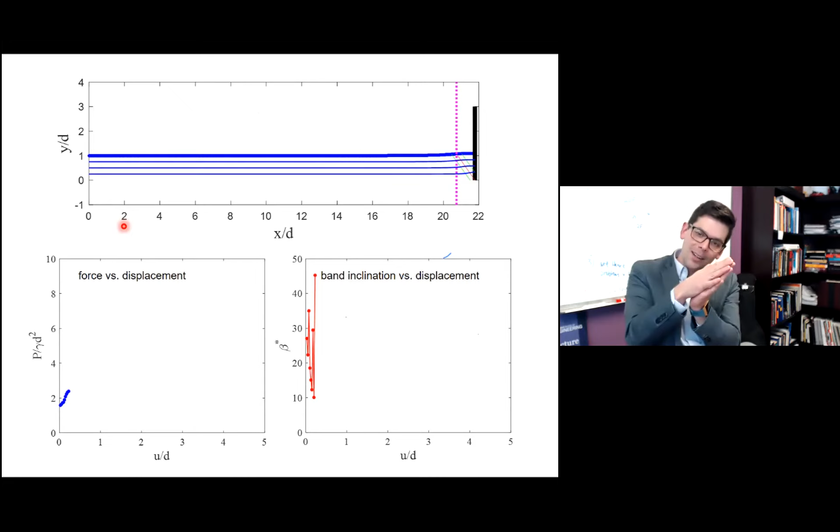If you put in hardening—and now these are kind of compaction bands—what happens is that as you shear on a band, you harden on that band, and it becomes favorable to just move away immediately. So the band inclination angle is oscillating wildly at the beginning of this solution, sweeping through this region of material. When you're done, it finally stabilizes and localizes strongly, and stays on a band.

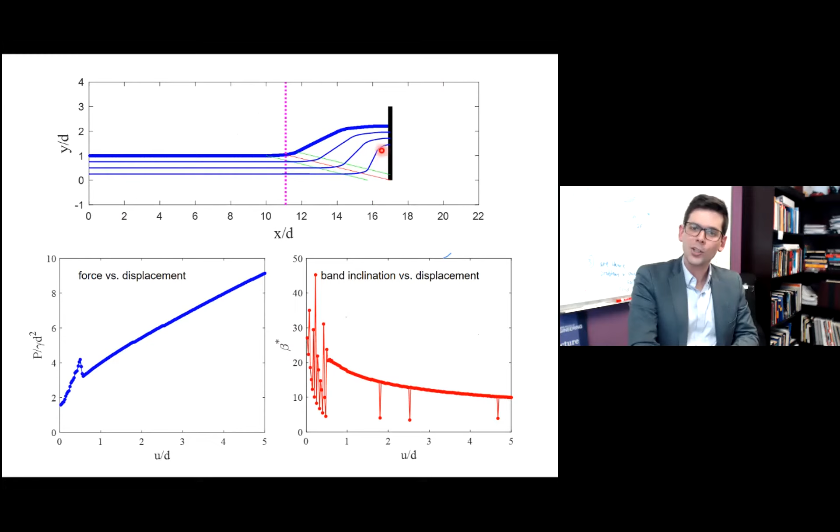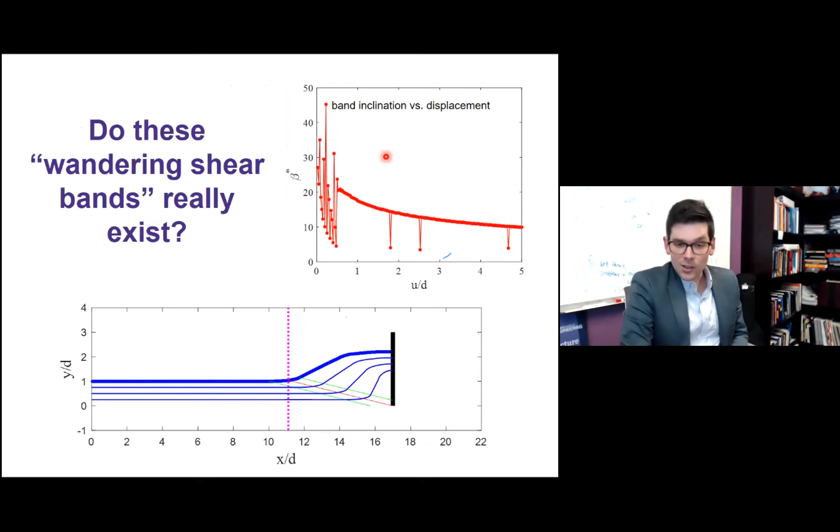But you can see that the final pattern of deformation is such that you would never even know there were shear bands in here. They're just jumping around, oscillating wildly, giving a pattern that appears to be diffuse deformation. And we asked the question—Zhefu and I—do these wandering bands really exist?

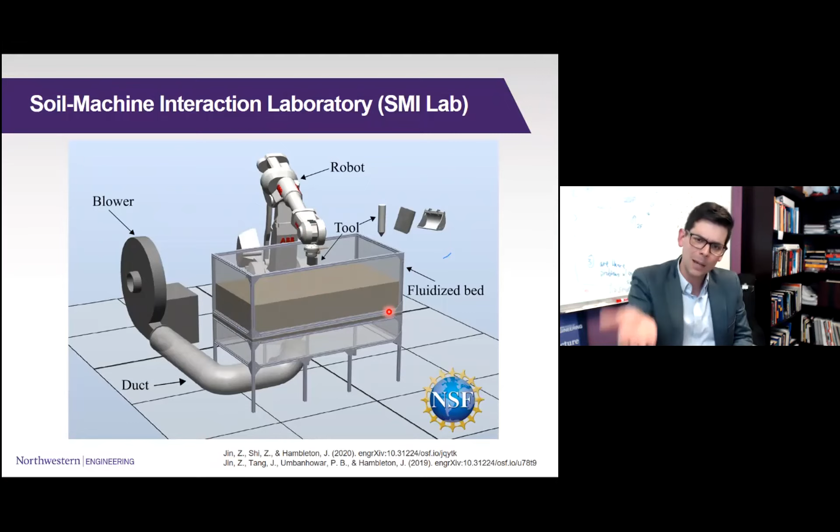I don't have time to go into this, but I can at least touch on the fact that we built, with Zhefu's great help, this facility using a 6-axis robot for actuation and a fluidized bed to prepare loose sand samples very quickly.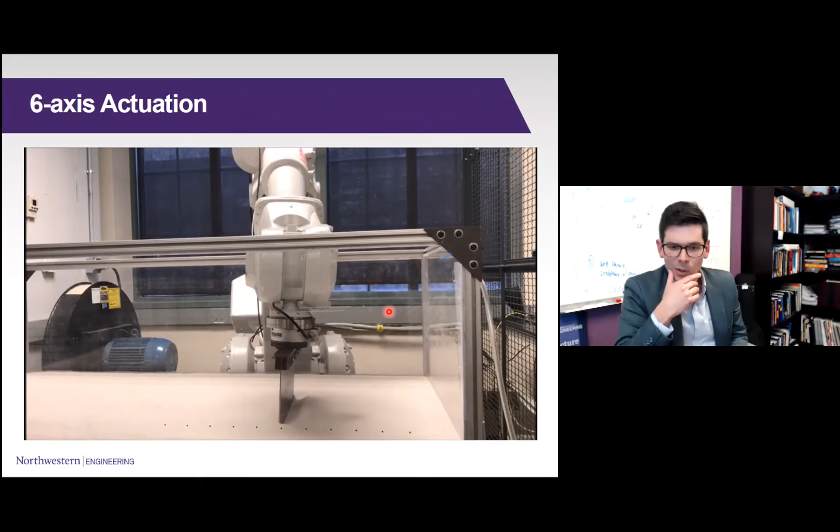Here's a little video—I forgot to optimize for sharing videos, I realized that at some point during my talk, so hopefully this is coming through reasonably well on your end. But in the lab, we can actuate these things quite easily for different processes.

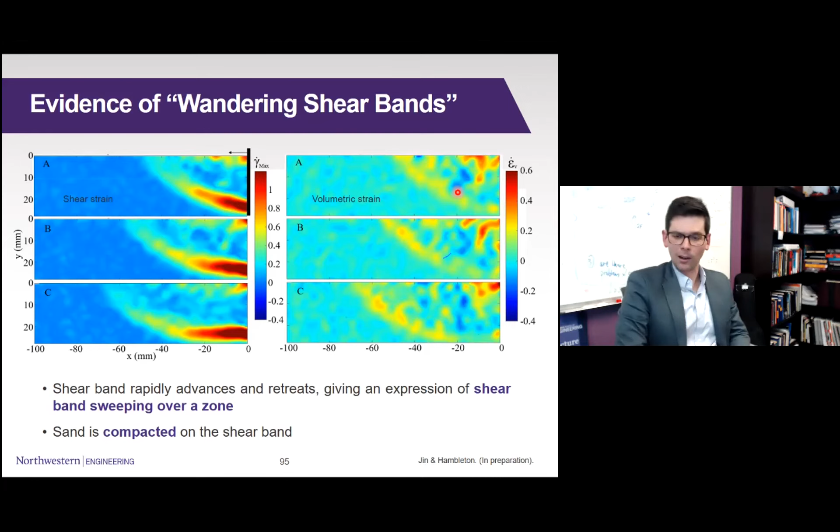I'm going to jump to the conclusion of Jaffe's work. She's going to defend here very shortly. She actually did digital image correlation on a loose sample, and was able to do the analysis to see these wildly oscillating compaction bands. This is a very recent result we're really excited about, in Jaffe's thesis. Watch for more on that soon. The video doesn't really show it, but this is plotting volumetric strain, and you can see these transient bands moving through the material, which this very simple model is perfectly capable of predicting.

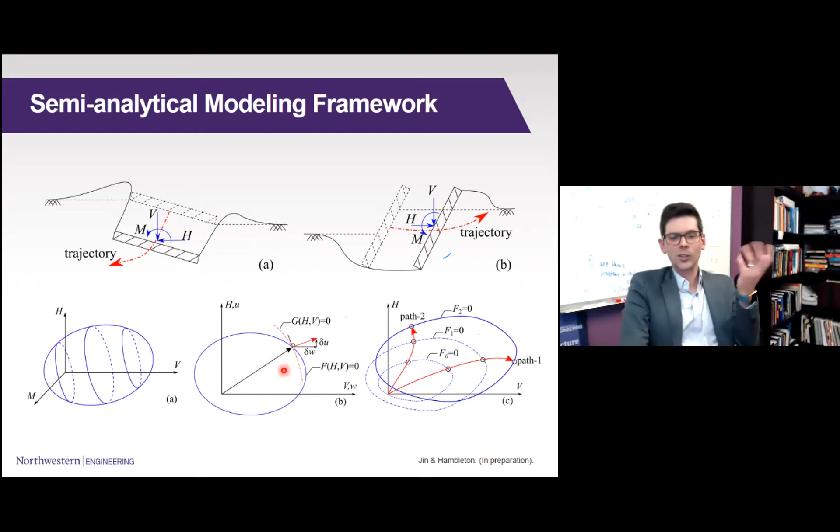Very nice result. So this is going onward and upward, as I say, the soil-machine interaction problem is a big thrust in our group. A talk for another day, which Jaffe has been championing, is that there are even simpler ways you can start to think about these problems using the idea of VHM envelopes. I don't have time to go into this, but basically you can have an evolving envelope, hardening or softening, where you're operating directly on the displacements and forces, and you can get really good results.

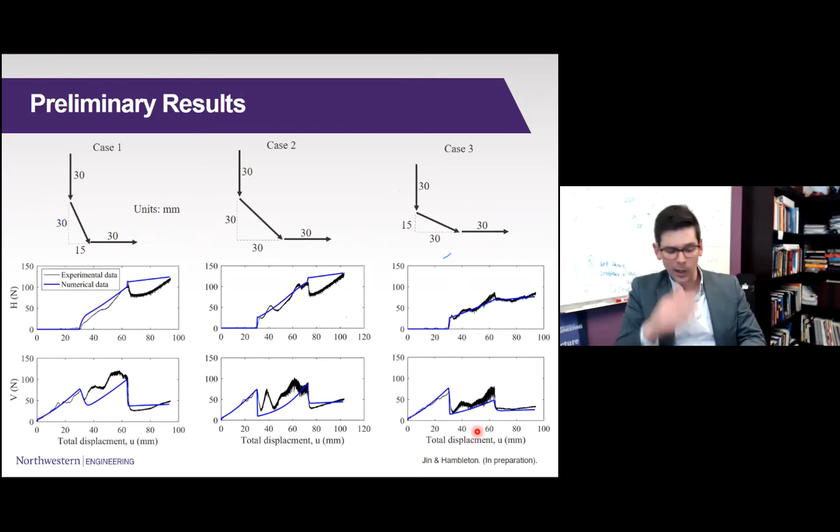So this is from Jaffe's thesis. She's able to predict the response of different objects moving through soils at different trajectories really well using this simplified model. And that's it. I'm probably over time.

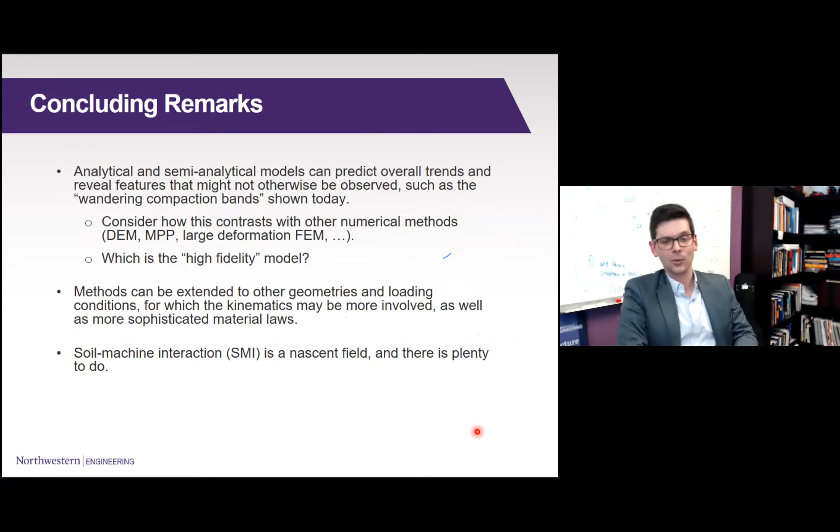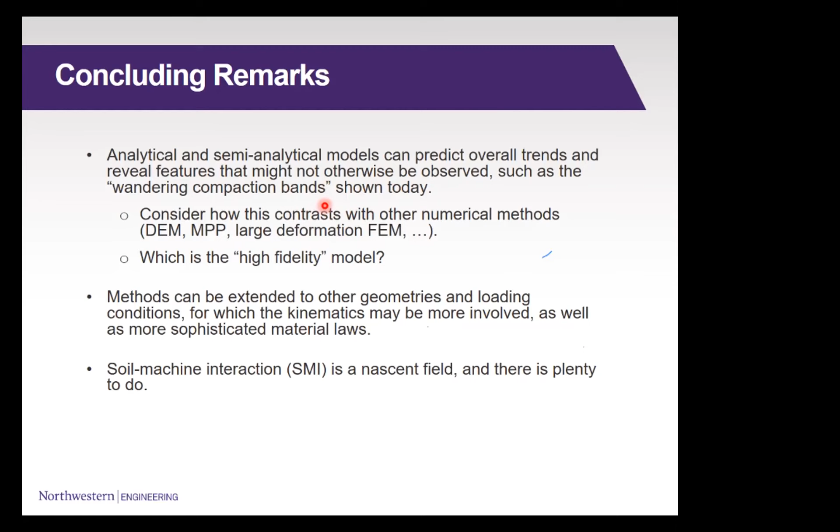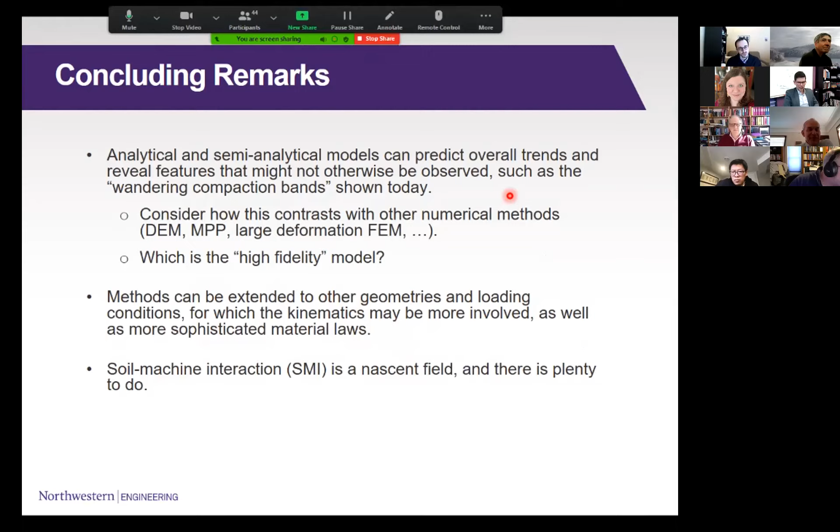Yeah, both very good questions. Let me go back. On your first question - one of the prices we pay with this simplification, why am I doing this, I can be smarter about how I go through my presentation - one of the prices we pay by going to this simplification, let me move things around on my screen, I'm sorry. Hopefully this works again. Using this simplification is that...

I've lost touch with kinematics completely. So you're asking the right question. Is it kinematically admissible? Probably not, probably not. And that's part of my saying that this is a very brutal, approximate approach where you're just sweeping that under the rug. Actually, I would expand on your question, which is a question for me too: what happens if you bring kinematics into this? We have ways we think we can do it in a simplified way, where you could think about the kinematics too and come up with compatible kinematics with all of this. But it's tricky, and it's cheating - I'm deliberately cheating by only considering the static solution. That's the answer to your first question: we don't know if it's kinematically admissible, and because we've made these approximations, we've lost the rigor of even really knowing what that means anymore, kinematic admissibility.

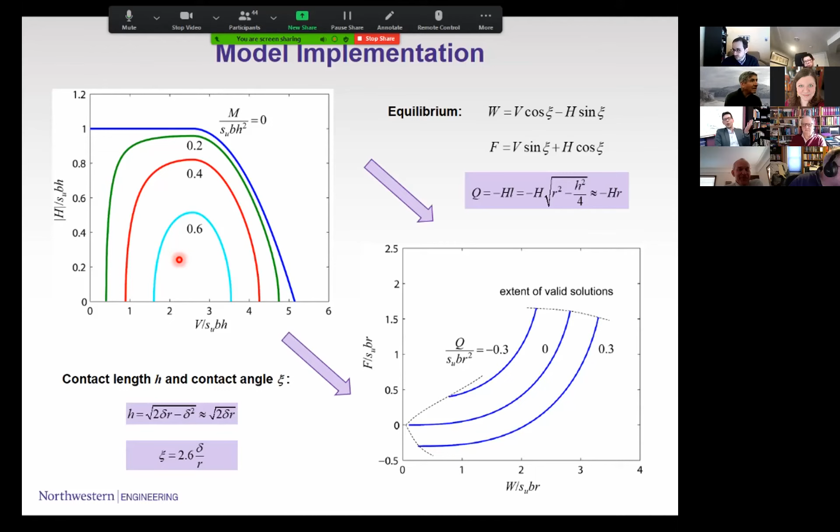To your second question - I won't look at Collins' original paper, but I'll look at the replotted one - you know, this question of uniqueness, it's not because of... it's because of the geometry. It's not because of anything about the slipline solution itself that you have this uniqueness issue.

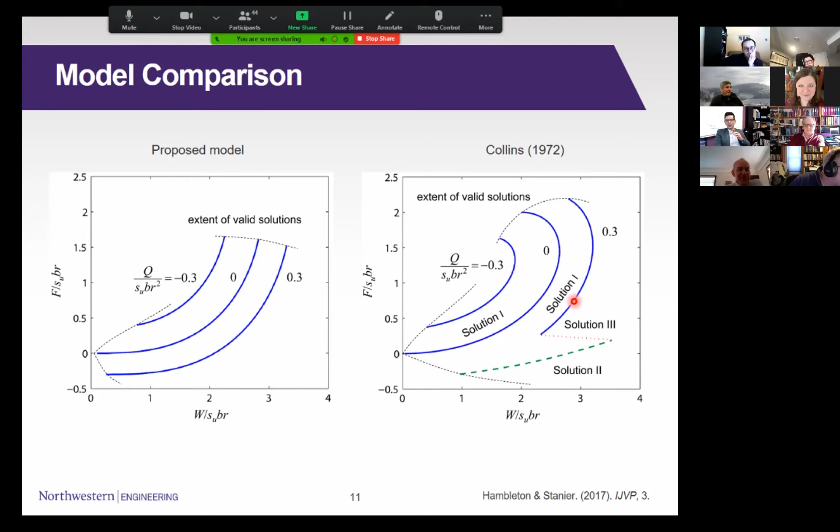In fact, this is a really nice way of highlighting the effect of the moving boundary. You need to deal with the moving boundary somehow in these problems. Because we're trying to jump directly to the steady state here, we don't have any clue about how we got here. We can't answer this uniqueness question because we just jumped to a state and don't know how we got here. But what's so beautiful about these solutions by Collins is that everything here is kinematically admissible, statically admissible. He doesn't extend it all to infinity, but everything is done properly. So those are really insightful questions.

Thank you. I think there's a couple of questions. Stefano, you want to go ahead? Sure. Thanks, Jim, nice talk.

I was thinking about the problem where you were looking at the backfill of a wall. You're pushing the wall against the soil, and trying to reconstruct the failure surface with this finite element-like approach. Those concerns reminded me of considerations about mesh sufficiency, mesh refinement, and potentially spurious mesh dependence you might get when you have failure zones and things like that. So I'm trying to reconcile what you said with this background.

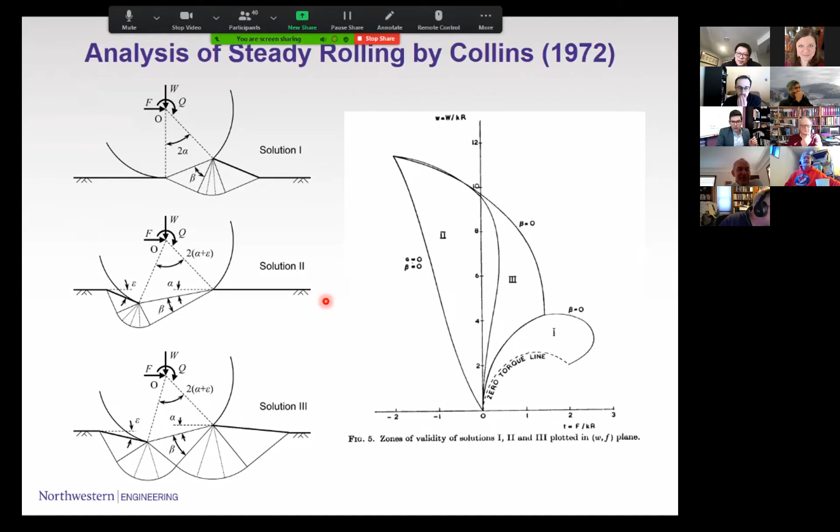Yeah, there's a subtlety. Let me share the screen again. I guess what you just mentioned - if I go back to... sorry, the problem with multiple screens is they don't always talk to each other well.

The problem here is actually, you're right. All of the dissipation is along discontinuities. You're not worried about what's happening internally.

Right, and therefore there's extreme mesh dependency here. That's almost the point - your solution is going to depend crucially on how you've picked this mesh. And in fact, your ability to generate something close to the true solution, whether it looks simple like this or relatively simple as in the case of the Collins solutions that just came before, you're going to have to make sure your mesh is aligned with those discontinuities if you're going to have any hope of getting it. I hope that answers the question.

They're kind of two different creatures - I think one is a severe mesh dependency. Right, but this mesh dependence does not come from the lack of length scale, right? Because for example, if I just input a cohesive law on the interface, there will be no mesh dependence due to length scale. It's really because of the mesh orientation whatsoever.

Right. Yeah, if I can jump in, my question was in fact a hybrid between what you inferred from what I said and what Jialiang was getting to. So I was saying that in some sense you perturb these elements, and then you end up having their sides aligned eventually with that failure zone, so that you force the side behavior, the edge behavior, to be the one inducing failure. So I can see that it's extremely mesh dependent, but I was wondering if there was almost an antidote against the other mesh dependence that might occur, because you really invoke only the contribution of that one side of the element that is involved.

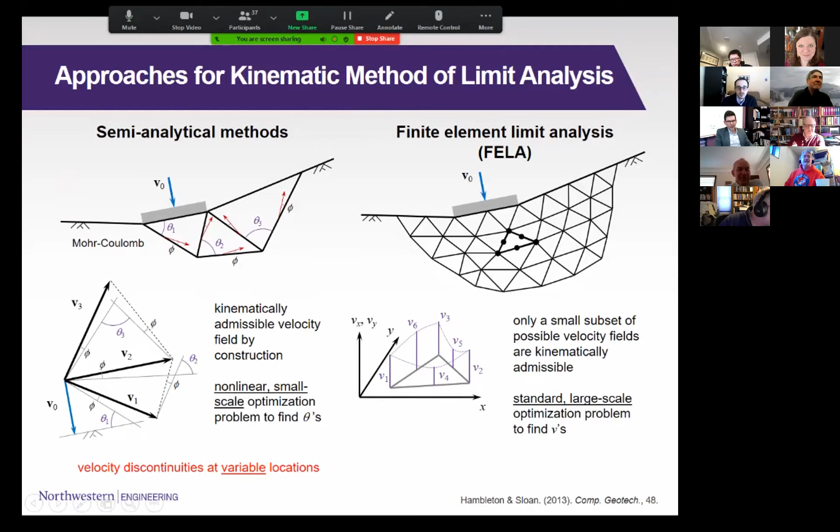That is a really good question. I didn't get any time to talk about this in any depth whatsoever. Let me go to the end. There was a really strong hint in here that I didn't get a chance to talk about: here are the numerical simulations, and what is hiding in here is this idea of design feedback. This is exactly what the philosophical question you asked - how do I build these analytical models unless I know where to start? I can use experiments, I can use simulations, but I do have to start somewhere, and they all are kind of informing each other.

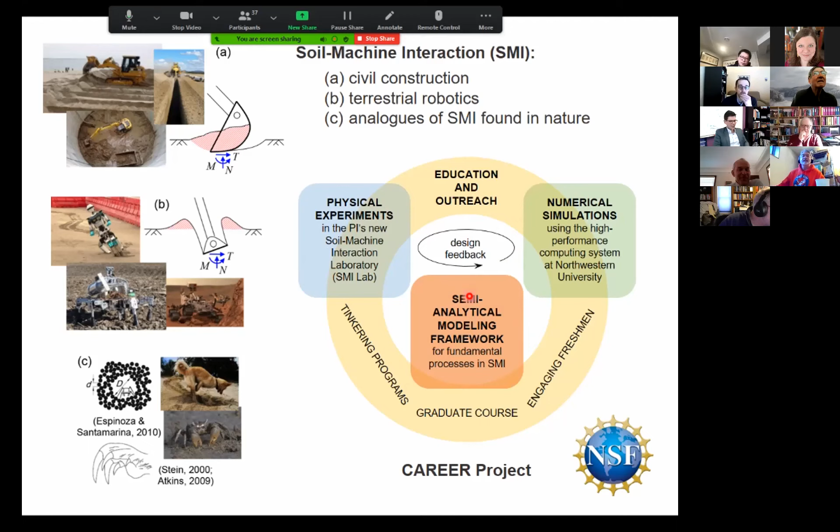So I think the answer to that question is, I mean, they're all connected, right? I made it in this provocative way, like which one's the high fidelity simulation, but we need it. And you wind up in this trap, saying how do you trust the numerical solution to give you good data for the analytical solution? Actually, Qinghao, one of my students right now, he's in that trap. He's using a finite element code to generate data, and then he's trying to use that data to inform an analytical model. It's really a back and forth circuitous process.

So you're keeping me grounded here. All of this was not to say that we don't need high-end numerical simulations, and I think you're right. The less provocative way to say it is that there's an interplay between the two. Yeah, exactly, and you have to refer to your intuition, your thinking, the models, the experiments, whatever you can get your hands on, right? Right, all right, thank you.